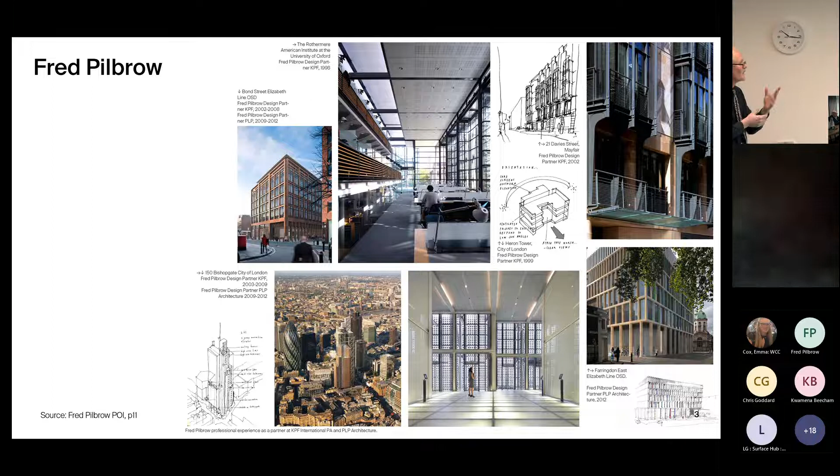We use thermal mass of the vaulted concrete superstructure. We use the mass of the books, and we ally that to night purge ventilation, drawing cool night air in and to a lantern at the top of the library. That has no air conditioning. It's entirely a naturally ventilated building, and students come here even in the summer months because it's a cool and refreshing place to work.

On our trip yesterday, I think I intimated we've got a long experience of working in Westminster, both doing new and refurbished buildings. This is Ingram House in the Adelphi Conservation Area, a rather unlovely 1960s office building that we did a cut and carve refurbishment to deliver residential sitting atop a plinth of offices.

More locally to the site and critical to, I think, the conversation we're going to have this morning is the Elizabeth line. I designed the over-station development above Bond Street, Crossrail West, to give it its full title, whilst I was a partner at KPF, and it moved with me when I moved to set up PLP Architecture in 2009. Rather by good timing, it opened this week. And this is a fundamental part of the conversation about 458 Oxford Street.

I don't have the embodied carbon that was invested in this piece of infrastructure, but it runs into the millions of tons. And it is an investment to deliver what I think is fundamental to our move to net zero: compact, efficient cities reliant on public transport, not private car usage. Intensification at the core, not sprawl to the suburbs. And when we look at 458 Oxford Street, within 5 minutes of this Crossrail station, we're looking at a site which is perfectly placed to deliver on those goals, to optimize development, as Russell in his opening remarks explained.

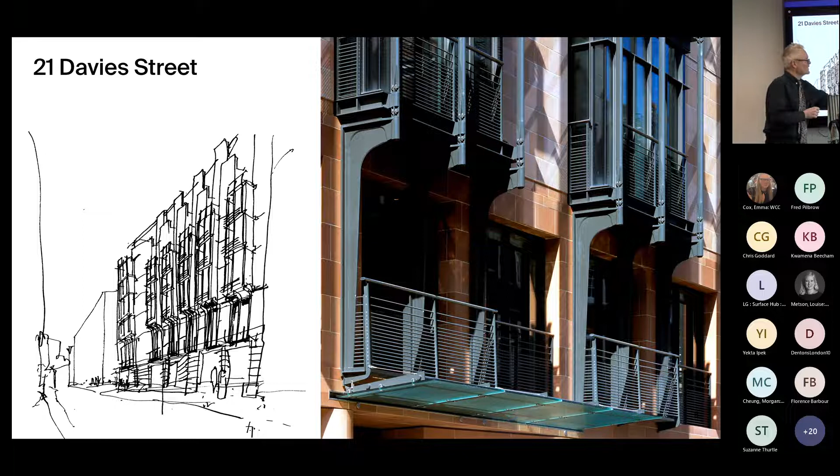Simon and I have debated a number of points on this project, but what we agree on is that we're not going to change the facade on 21 Davies Street after 25 years. This building talks to the quality of what we deliver and its durability and its long life. So in 2013, I set up my own practice with 5 fellow partners. And this is us 3 years later, proudly sitting in front of our first completed building, the Waterman down at Greenwich for Knight Dragon.

In the intervening 9 years, we've been privileged to work for a wide range of private sector and public sector clients. This is a project I'm particularly proud of. It's the specialist ear, nose and throat hospital that we designed for University College London. It sits in the heart of the Bloomsbury Conservation Area. It's a modern building, but sensitive to its setting. It's also a building that speaks about the life within. So patients faced with the unpleasant task of going to their dentist do at least get to circulate in the daylight. There are waiting areas in these bay windows screened by perforated brick that filters the light to the interior.

And I said we are passionate about sustainability. This project we designed for Dutch developers, Edge Technologies, who are internationally renowned for being at the very cutting edge of the best sustainability and the best well-being. We're designing their first UK project, and they picked us because as a practice, we developed our own in-house resources for environmental analysis, and we integrate that into our workflow to deliver better, more efficient solutions for our clients.

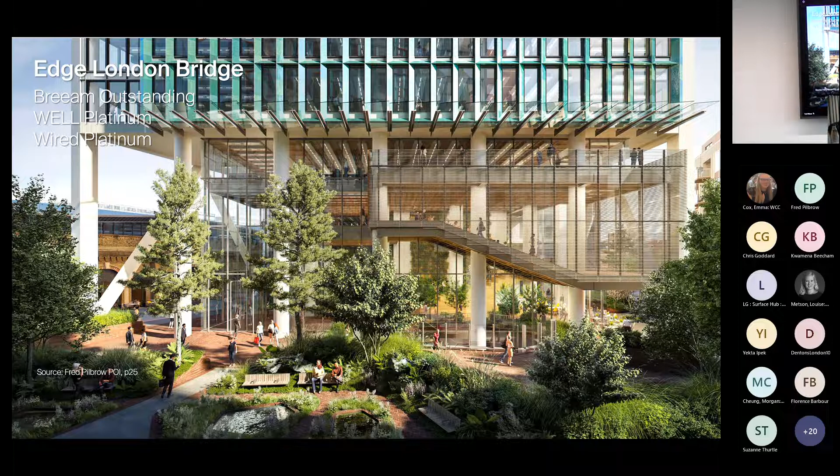And it's a garden park that the greening then flows into the base of the building, and the base of the building is public. It's a rather Dutch sort of view, moving away from the idea of a kind of august corporate headquarters towards something that's more public, more democratic, and more open.

And you see here in that public base of the building that the building is made of a hybrid structure. It's a similar structure that we'll develop at 458 Oxford Street, post-tension concrete with high cement replacement and structural timber. And they're working together, with concrete giving us a slim, low carbon, very robust superstructure, the timber giving us flexibility to connect and reconnect floors.

So here we are on the ground floor in the entrance lobby, and in fact, you're walking on recycled materials. This is crushed sanitary ware. So I don't think it's in the marketing, but you're walking on toilet bowls that we're going to recycle and use for the base of the building. There's a lot of recycled content, including the 6-story building we demolished to make this building. We're using a lot of the structure of that back into the landscaping and the new building itself.

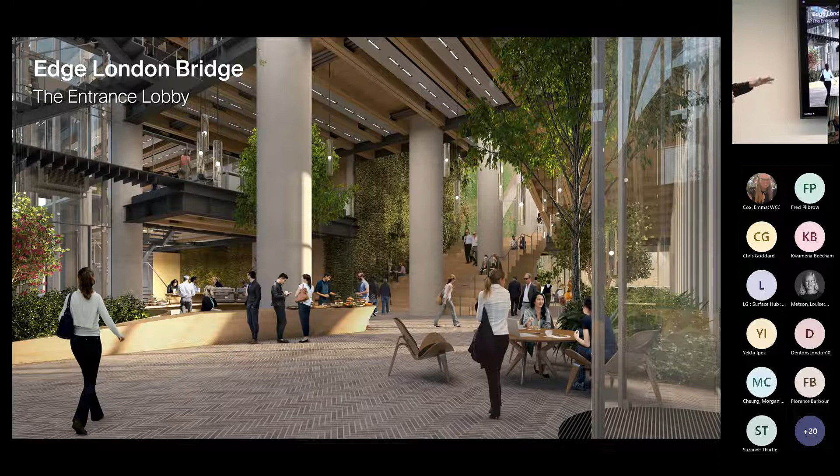Edge is important as well because it provided a lot of models for how we might approach the design for 458 Oxford Street, including sensor integration, of which Edge are absolute world pioneers. We're using a similar displacement ventilation system, so the air comes in quietly and cleanly from the floor. We expose the structure to the office space using the fabric of the building to temper the internal environment.

We're delivering energy efficiency of 63 kilowatt hours per square meter, inclusive of tenant loads. That is, to the best of our knowledge, the lowest, most efficient building in London. And to pick up the conversation about the integration of post-tension concrete and structural timber, that's delivering a very low embodied energy for the building.

It was about 860 kilograms of carbon for A1-A5 at stage 2, which is where we're at on the Oxford Street project. But working closely with Mace, who've just been appointed to build the building for us, we've driven that down by 20%. So we're now at 690. And that's an important point to make, that we will continue to push down embodied carbon. We'll continue, as we've done on this building, to push down operational energy usage.

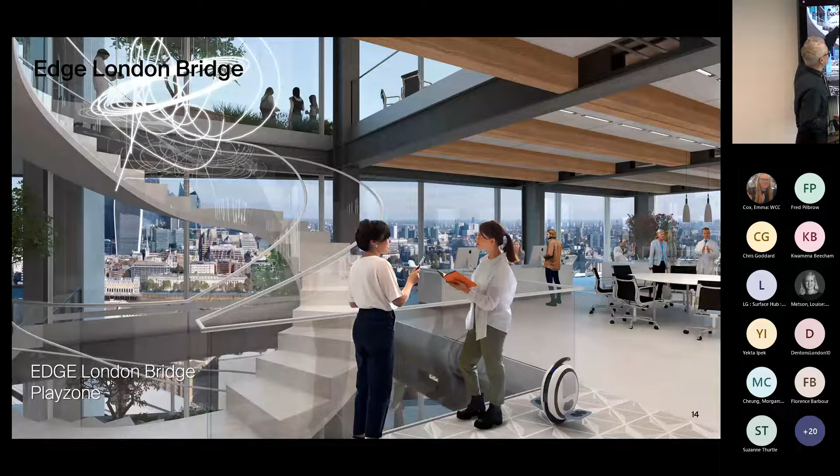Now, the play zone, as we somewhat lightheartedly describe it, is this timber zone when you first come out of the lift, and I'll show you the same thing at Oxford Street. Here, a tenant has made a connection across these 2 floors, and standing in the same position, this tenant has made other choices. So this is about long life and flexibility and adaptability. This is very key. We don't know how the building will be used in 10 years, in 20 years, in 50 years, but we know if we provide ample dimension and we provide flexibility, it's much more likely that the building will continue to have a beneficial long life.

And just while we're on this slide, another prompt for me is to remind us that we have gardens distributed up the height of the building. And well-being is every bit as important as sustainability for the current occupier market. People are drawing their teams back from working at home. We need to bring them back to a healthy, fresh, vibrant workplace.

Ian McCarter from Knight Frank, in his specialist report, described this as a flight to quality. Tenants are increasingly interested in how environmentally sustainable is their workspace and how good are the well-being credentials of it. This building ticks both those boxes.

So wind on to earlier in the summer, the office has grown to 70 people, and you'll recognise this because we were here yesterday, the Kensington building on Kensington High Street, a refurbishment of a former department store and one next to a Grade 2 star listed department store. We're feeling resonances, I think, with this morning's conversation. But there are, as I will explain, important differences between this site and Oxford Street, and those differences shaped our response to the two sites.

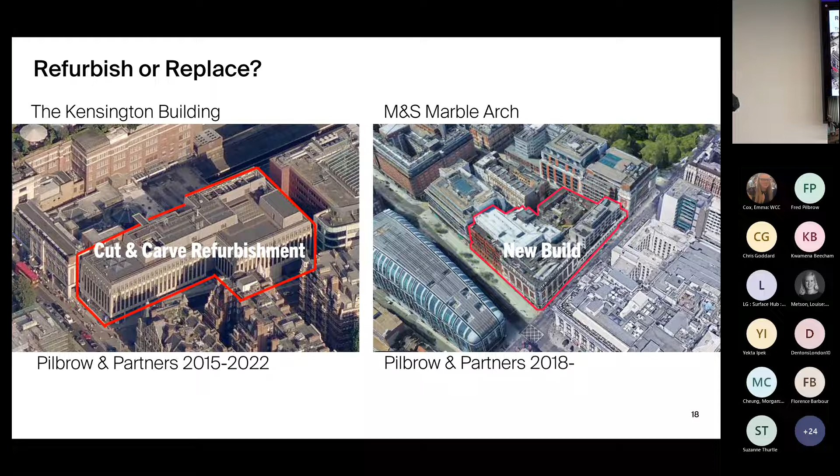So you'll see this rather brutalist orthogonal facade. We can restore the historic street line on Wrights Lane. So the differences are really profound to the opportunity that confronted us at 458 Oxford Street. There, we didn't have a single building. We didn't have a robust, regular structure. It's very clear that the site's development potential significantly exceeds what one might do in a refurbishment. And we have a single building to work with, and that profoundly affects the quality of the inside space.

So what we did on the Kensington building is... Fred, just before you move on, can you explain cut and carve so I'm completely clear about what's meant? Of course. Thank you for your question. So there are a range of refurbishment or retrofit options that can be deployed. A light touch refurbishment would seek to minimize the embodied carbon. So you would take the found condition of the building and you might judiciously upgrade the fenestration in the facade. You might do double glazing, you might renew elements of the plant, but you would say fundamentally the building's found condition is acceptable.

Here, we didn't feel that applied, and we employed a cut and carve, which is to say we demolished cores within the existing building. We created a new core out on the east elevation. So the cut, I guess, is what you take away that isn't working, and the carve, I guess, is what you're building back. And specifically, this drawing, I think, shows it nicely. We demolished the roof slab, we took away the cores that were distributed across the floor plate, and then we built back. Built back in a hybrid structure, post-tension concrete, bringing out the facade line on Wrights Lane, a new steel core at the back, and a new steel superstructure. We walked there yesterday on the 5th floor.

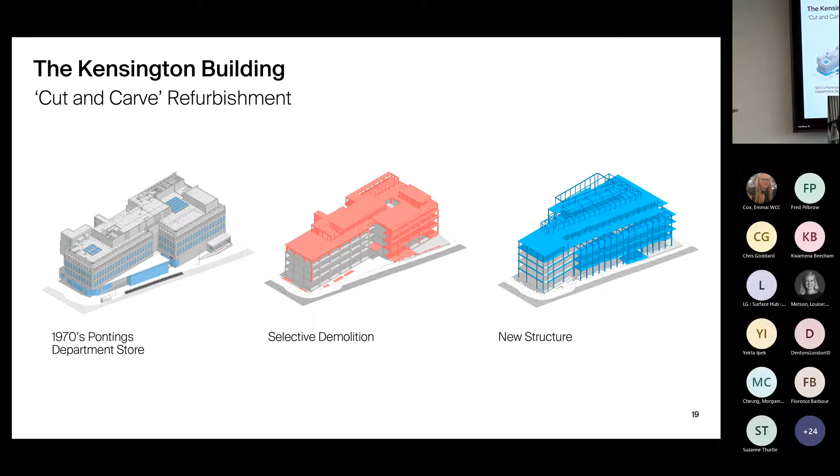And the building itself responds to a complex circumstance, to our balancing act, including residential neighbours here on Iverna Court. So we brought the facade line out, but we terraced back to preserve great daylight to those neighbours. And we like those terraces. You saw yesterday, they're beautifully landscaped garden terraces as an adjunct to the office space. And you'll notice that our context also includes 2 department stores. They're listed Grade 2, Barker's, and Grade 2 Star, Derry and Tom's. And they have some resonance, I guess, with the context for our Oxford Street site. Portland stone, giant order with bronze infill.

And actually, to some extent, the response we're making at Oxford Street has some resonance with the response we made here at Kensington, because we wanted to acknowledge that relationship. I love the phrase about the great galleons sailing down Oxford Street. Well, in a smaller flotilla, there's some great galleons here on Kensington High Street. And we wanted to acknowledge that, and yet at the same time remain subservient to the Derry and Tom's building. And we chose a white Roman brick. And the nice thing about the brick is, although the coloration makes the strong match you see in this image, it also acknowledged that we had brick neighbours across Iverna Court. It was, if you will, a more humble material, but one that has great richness and detail and depth.

And we celebrate the depth of the construction. We celebrate, for example, that we have opening lights. We're great believers in mixed mode and natural ventilation. You can open the windows to ventilate the offices, and the decoration of those window panels again makes some reference to the Art Deco detailing on Derry and Tom's.

So I was explaining differences between Oxford Street and this building, and this plan will do well to illustrate the regular column grid. You can see the original trace of the stepping building. We bring the facade out on that side. So you come onto that floor plate, 4.5 meters clear, things lined through. They've got a generosity, a scale, and order that makes it absolutely appropriate to deliver this quality of a workplace environment.

And I thought it was helpful because I know Simon and I, on our tour around the M&S building, were looking at some plastic ivy. We're not doing plastic ivy on 458, we're doing real plants. And our landscape architects, Gillespie's, who are brilliant, did the landscaping on this building.

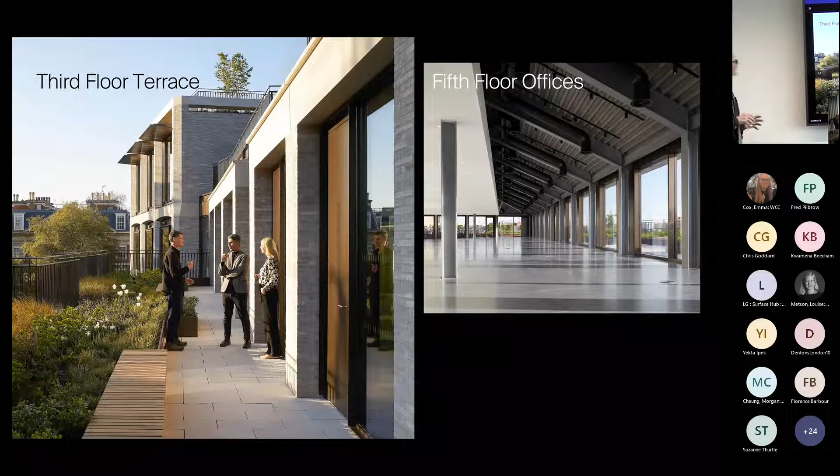And you could see what that was like in views from the conservation area around the site. Terraces on the lower levels, terraces again as at Oxford Street on the upper levels. What we didn't talk about on the site, which is in my proof of evidence, is what all that is delivering, and it's delivering very good operational energy.

So again, inclusive of tenant allowances, 105 kilowatt hours per square metre per year, and that was less than half the historic building. So more efficient plant, more efficient facades, delivering good operational energy. The embodied carbon on this building is 700 kilograms of carbon per square metre, A1-A5. And again, just so I'm clear on my terminology, A1-A5 is the construction carbon up to practical completion.

Now, there will be more embodied carbon over the life of the building, and there will be operational carbon, B6, and the water, B7, over the life of the building. So when we talk about whole life over 60 years, we're balancing two types of embodied carbon, to build the building and to maintain it, and laying on top of that the operational carbon. So I'm now talking about the building carbon, the 40,000 tons that I think was referenced by Matthew in the context of this project correctly. And the building carbon on a square metre basis is 700 kilograms.

Now you'll notice that that's higher than the predicted figure we have on 458 Oxford Street at the stage of design. That's 653, and Mel Allwood's proof gives you that detail. It's not to say that a refurbishment on the Oxford Street site would have this number, but it is a caution to say that deep cut and carve refurbishments can be associated with high levels of embodied carbon. And certainly we're in a grey area, not white refurbishment, low carbon, black, new build, high carbon. We're talking about differences of carbon intensity. And in this case, the results are great.

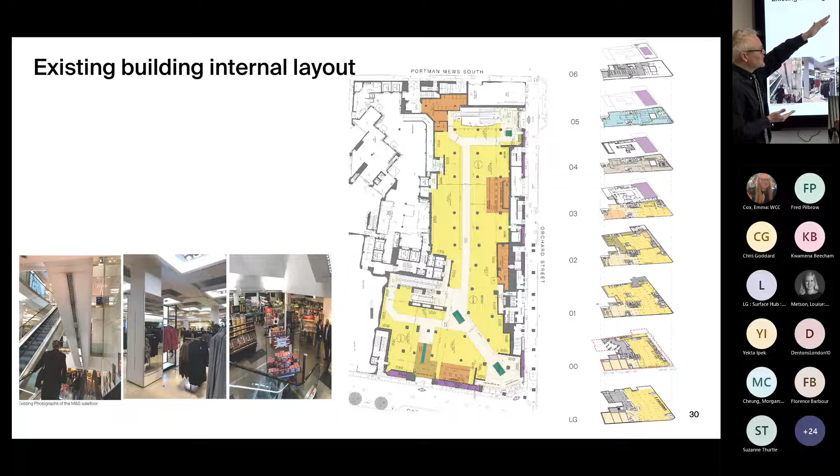You're also seeing the drop off in flows as you come away from Oxford Street. So you've got a series of very small floor plates. They run originally up to level 3, and fewer people make it to the upper floors. And you can see that in the sales data that M&S have published. It's not good enough. And it's got tougher for bricks and mortar retailers, because in the time of the rise of internet shopping, perhaps hastened by the challenges of the pandemic, people won't go to an environment that's as poor as this. It's just no longer competitive. We'll just click online rather than go to a space that's confusing and dispiriting, bluntly. So we've got to up our game.

And that's not only a challenge for M&S, although I think the existing building does exacerbate those challenges, because we've seen along Oxford Street the closure of Debenhams. We've seen along Oxford Street the closure of House of Fraser. John Lewis are radically downsizing. So it's part of a much wider challenge for the high street. And I actually remain really bullish about the high street. I think as an architect, they're a critical part of our public realm in cities. They're where we share space. But Oxford Street needs to evolve. And our vision for its evolution is for it to become more genuinely mixed use.

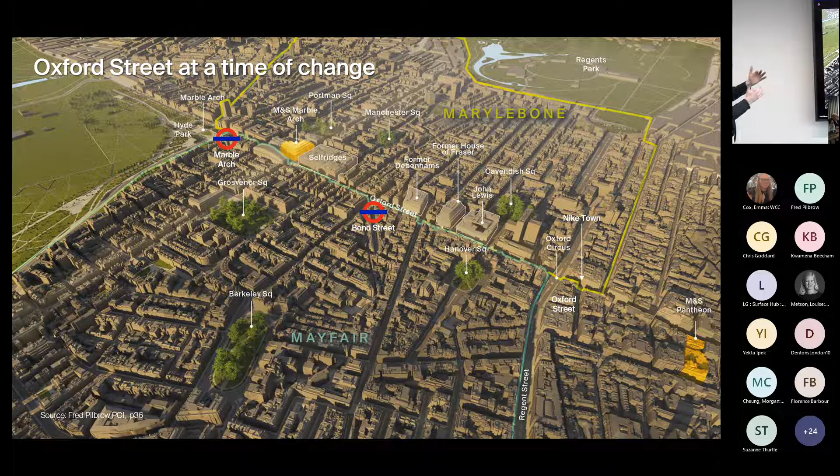So historically, it was a retail thoroughfare. I mean, that's not really true, because historically, I think 20% of the jobs was in retail and 50% was in professional services offices. But it needs to become more and more mixed use. So we bring new uses, office uses on this site, that will contribute to the vibrancy and the vitality of the street, will remain a public thoroughfare at the very heart of Westminster.

And the data's everywhere. You'll read the specialist reports that Andrew Bond has produced about the really challenging conditions for retail. But just if I take a snapshot, you've read in my evidence, looking at the street in 2017, this was the mix of department stores, high quality retail, some low quality retail, sort of temporary candy stores that we saw, and vacancy. And 5 years later, you can see the department stores have shrunk, the high quality retail has shrunk, the candy stores have grown, and the vacancy rates have also grown significantly. So we're looking at Oxford Street-wide challenges, and M&S are working within that overall environment.

The street, when we started work in 2018, and there was a question about these retailers. Were they pushed out by this development? Well, actually, they have a separate landlord, London Asset Management. And Andrew Turton from M&S confirmed that, in fact, these retailers paid to leave earlier than their lease expiry date. So we're definitely not responsible for what you saw walking around the site, which is low quality candy store retailers that are compromising the quality of the street.

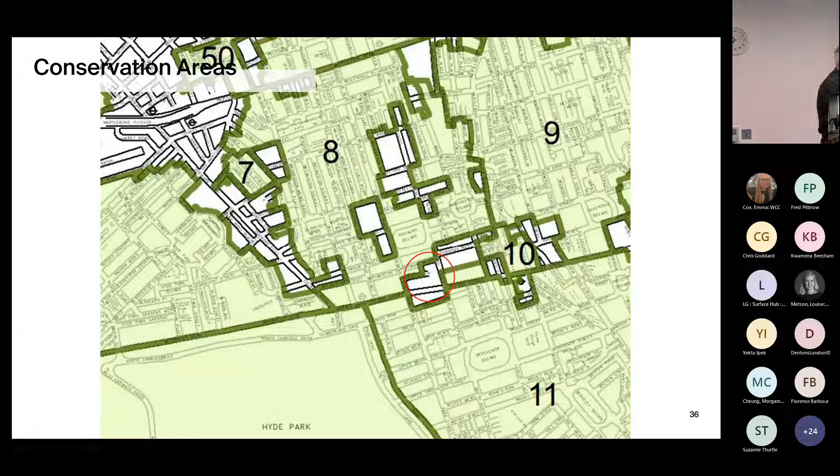The 3 existing buildings on the site are not in the conservation area, and I don't think that's an accident. I think Westminster are a pretty efficient and professional local authority. They have a statutory obligation to review conservation area boundaries on an ongoing basis, and quite clearly, those 3 buildings have been excluded from conservation areas that surround the site. We were talking about analogies of Kensington. Again, same situation. Kensington, we're not in a conservation area, but we were surrounded by conservation areas.

3 buildings. I guess the 2 that flank Orchard House are, for me, negative in respect to the surrounding conservation areas. This building, a non-designated heritage asset, sits at the lowest level of heritage significance from a statutory standpoint, as was discussed yesterday. It's not of listable quality. Now, there will be others more expert than I that will talk about the relationship of Selfridges, the fantastic Daniel Burnham Beaux-Arts masterpiece on the other side of Orchard Street, and this building. But what I see is, if there's a relationship, it's one that's very derivative.

I mean, this is a commercial office building. It's not designed for retail, and you can sort of see commerciality creeping in. So you notice that the giant order Ionic columns on Burnham get kind of reprised as pilasters here on Orchard House. But we squeeze in an extra floor. So rather than 3, you get 4. They're squished in a little bit. And rather than those great 2-meter deep columns, it's all thin paper. It's pushed to the thinnest degree. So it has a kind of meanness about it in comparison with the Burnham buildings.

And Pevsner agrees. The pilastered Marks and Spencers, he's not quite right about that, because actually it was designed for John Lyons. "The pilastered Marks and Spencers 1929 to 32 by Trehearne and Norman with W.A. Lewis shows clearly what a convinced single-minded design Selfridges was." So it's damned, if you will, with faint praise.

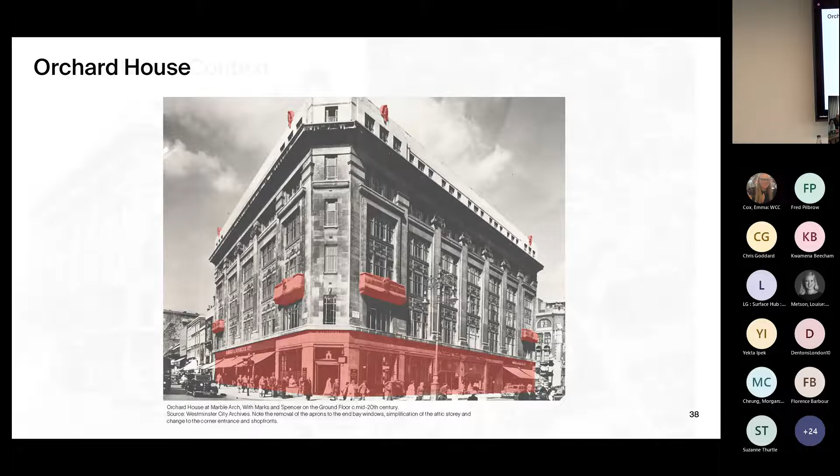And it's a building that's been very substantially altered. Buildings do get altered, but this one's really been scraped. So the decorative carvings of Mr. Lewis removed, with the exception of the Knight's Head that we're going to relocate. The balconies on the first floor stripped away. So we're looking at less than an original design. I think that original design not exceptional.

We're also looking at a change to its urban context, which is really important to the work that we'll look at on the site. So originally it was a building that terminated an urban block, and Granville Place ran through to Orchard Street, and Orchard Street then provided a connection through Somerset Street to St Christopher's Place. Well, Selfridges has expanded across that, but as we walked yesterday, you see the route is still clear within the store.

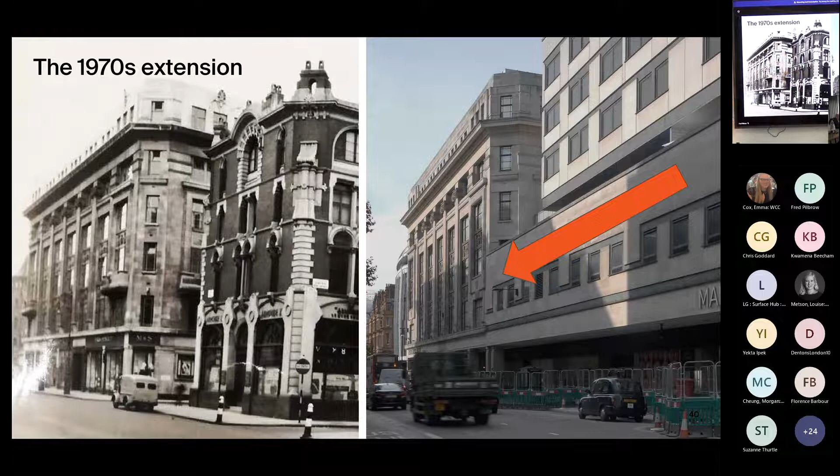In 1968 to 1970, the 23 Orchard Street extension was constructed, blocking that route, and is it Roy Lichtenstein's Kapow? I think architecturally this is brutal, abrupt, and poor. It just crashes into the back of Orchard House. And it gets worse, because at the time of the extension, the road was widened, 4 lanes rather than 3, and that drove an undercroft under the bottom of the building.

So it's been kind of crashed into on the edge, it's been stripped on the upper levels, and we've now got an undercroft along Orchard Street. And this undercroft, which we walked to yesterday, is dark; it's an oppressive environment for pedestrians. And I think it's worse, the fact that you don't even have the shop fronts on this side.

We don't have them because there's a core sitting there. So you're between a blind solid wall and a row of columns hard out onto the footway. It's not good enough, and it's not good enough in policy as well. So if you look at the Oxford Street District Place and Delivery Strategy, Westminster's document says Orchard Street, not good enough, needs to be improved. Granville Place, not good enough, it needs to be improved.

And the 1973 building bridges over Portman Mews South. It's calamitous in terms of the quality of the public realm, a dark, low tunnel. It's calamitous in terms of its impact on Hesketh House, the Hanston building that takes us to Portman Square. And we walked this yesterday, it gets worse around the back.

On Granville Place, Russell said, does it smell bad? It smells of diesel. It's really a really poor environment for pedestrians. Well, there aren't pedestrians there, and it's probably good that there aren't, because to access these loading bays that dominate these frontages, we've got vehicles reversing across the highway into the loading bays. You would never be allowed to do that today. It's completely unsafe and unsustainable.

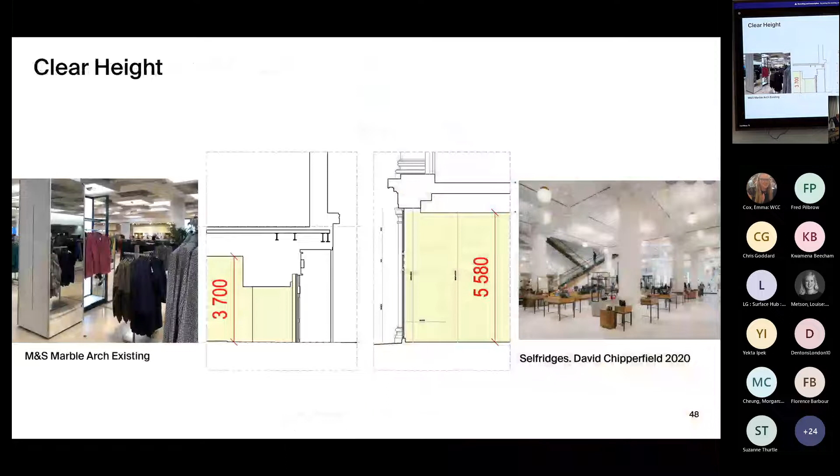But equally, we don't know what the future will hold in the long term. And a lot of the conversations we had with M&S's brilliant retail team was to say, well, what things are coming along down the line that we can see now? I guess those are Donald Rumsfeld's known unknowns, things like, for example, till-less trading. That's coming, and we're thinking about it in the store.

But actually, the biggest legacy for long-term flexibility is generosity in scale, so that we have an open, adaptable floor plate. And I liken this to retailers' theatre. In a way, we're building the infrastructure, but the scenery will change, will evolve, will adapt to stay relevant, to stay attractive, to stay successful. And that's possible because we're creating the right framework for that transformation to occur.

It was also really clear from the data that fewer people go further up the building, so we've got to be a ground level proposition, all space within one floor of the Oxford Street entrance. That's absolutely fundamental. So you come in, go down a floor to food at the lower ground floor, go up a floor to menswear on the first floor.

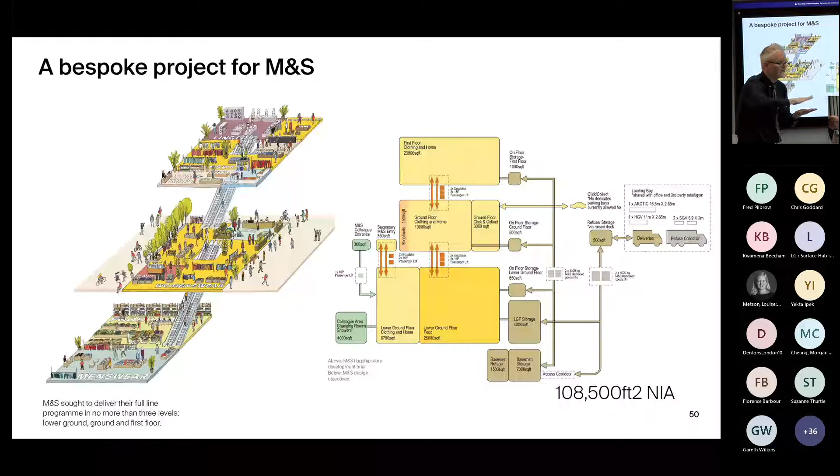We therefore need large floor plates. We therefore need the lower ground floor to be retail trading. Now that's absolutely fundamental to what we'll talk about, because actually what you need in these buildings is a lot of support infrastructure. So we don't have any cars, but we do have fantastic cycle facilities, lockers, showers, all the ancillary for that stuff. Where does that stuff go?

We have plant that's going to deliver really low operational energy. Where does that stuff go? Well, in a refurbishment, you're locked into the existing lower ground floor. You can't dig a deeper basement under the existing building. So we know the answer to that. It goes on the lower ground floor. But the corollary of that, of course, is that you don't have retail down there. And that means that the M&S stuff has to go up, not one floor from ground, but 2 or even 3. So fundamental to delivering this vision, we need to create some basement space to deal with those support functions.

And this is the detail of the area brief. We also were given dimensional targets and so forth. But when M&S started work, and we were working from the summer of 2018, they explicitly tasked us to take a comprehensive set of options. We would have done this as architects in any case, and consider all potential routes to delivering their brief. And I summarised in the DAS here 16 of those options. There were many more. And they dealt with a number of issues that we now think of as settled, but were live for us to determine.

So, for example, did we include Neale House, or did we seek to deliver their brief just on the Orchard House and Orchard Street extension? Did we deliver one building on the site or 2? And what if the site's capacity was significantly more than the retail demand? What was that balancing use best conceived as being? Was it office? Was it hotel? Was it residential? We looked through all of those options and we were helped in that journey by close and ongoing dialogue with Westminster to assess the relative merits of those schemes. We included a wide range of refurbishment schemes, light touch, cut and carve, facade retention.

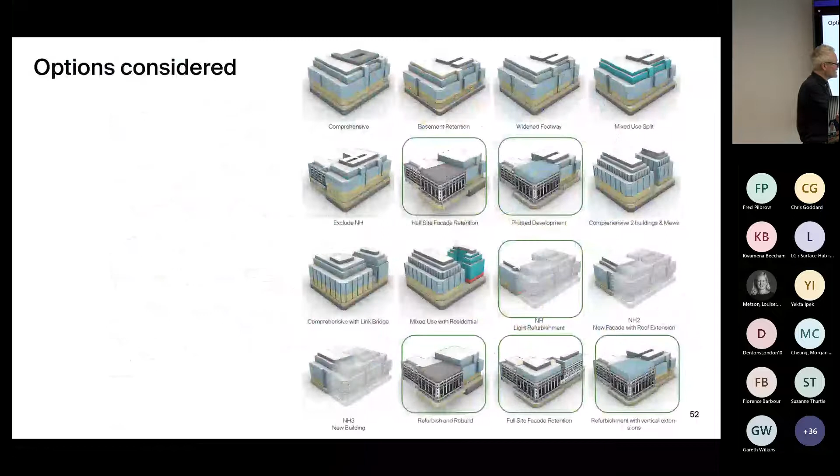Just to take one example, this was a study looking at excluding Neale House. We were thinking, could we use Neale House maybe as a decant space while we delivered accommodation on the Orchard House and Orchard Street extension, and looking to how we might configure large floor plate retail for M&S on the lower floors. You'll notice here, because it's a refurb, we don't get any basement space. So here, the yellow is the M&S running on those upper levels. And then to access the offices across the top, did you create a core on that edge? But I've got to say that none of these schemes came close to meeting the requirements either of M&S themselves as a retail operator, nor optimizing the site dimension.

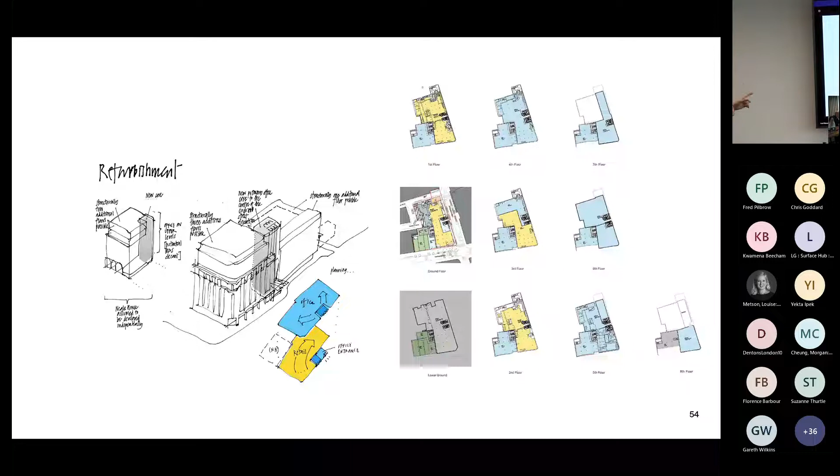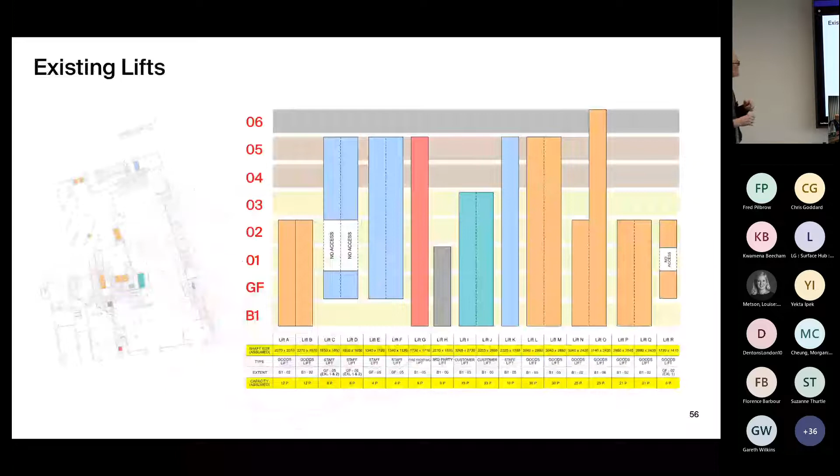And some of the challenges that we were grappling with back in those initial studies was looking at a building. I've talked about 3 buildings and the challenges of 3 different structural systems, different grids and their misalignment. But actually, to make them function as multi-level retail, huge amounts of adaptation took place since the building's construction. So we have no less than 9 cores scattered across the plan, a lot of the cores at the building's perimeter, and no less than 18 lifts. And you can see that the lifts are a little bit vague: some serve some floors, some don't serve other floors, some are passengers, some are goods. They're scattered across the plan.

And those cores and the lifts within them block the views on the ground floor. That's bad for the public realm. It's bad for an M&S brief that now wants daylight. And of course, on the upper levels, those cores are very problematic for daylight to the office use. I guess all of this is saying that light touch is certainly very problematic because the basic form of the building isn't going to be good for that future office function. And, you saw it looking around the site, the majority of the windows are blocked. It's not that they've just been filled over, they're blocked with actual cores that have been inserted in behind those facades. So we really need to remove the cores to get light back into the interior.

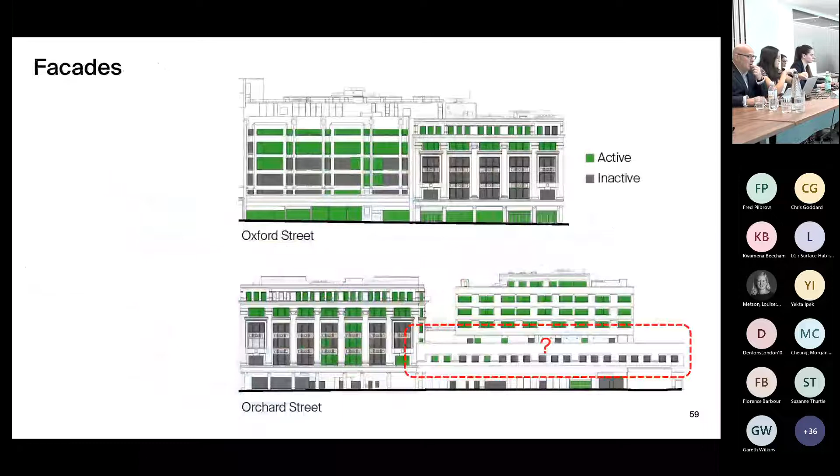And we've got sections of the fenestration. Let's look at 23 Orchard Street, where the quantum of glazing is wholly inadequate to, for example, an office use on the space behind it. So there are built-in problems with the fenestration from sections of the site. And then we come to the columns.

I think I actually pointed those four out to you when we were in the store. So you have quite a tight column grid generally, but you also have zones of very, very intense columns with gaps of sort of 1.5 meters. So effectively, it renders the space around those very densely columned spaces unusable. You can't do display in there. They just effectively end up being kind of neutralized space.

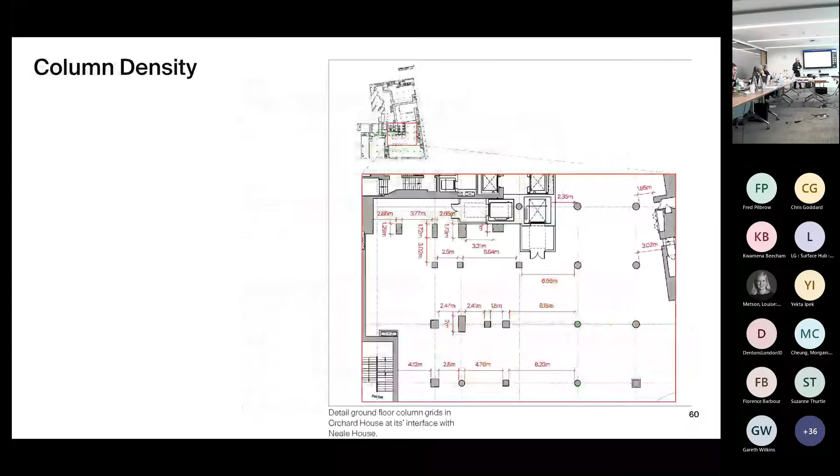And the tough thing about the columns here on the ground floor, here on the typical floor, is that they are the building. It's the thing that holds the building up. So yeah, we can talk about removing cores, but we can't realistically talk about removing the columns. They're basically what is invested, in Griff's terms, in the embodied energy of the existing building.

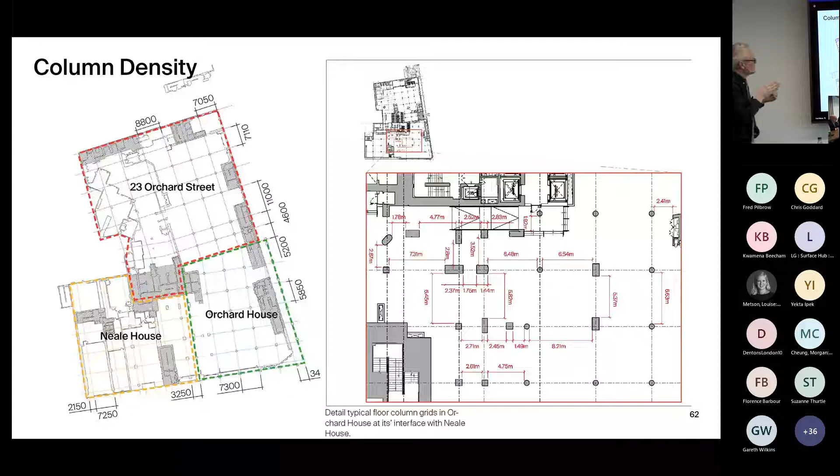And as you saw in those long views around the store at the moment, because the grids misalign and crank, you don't get those nice clean sight lines we saw in Selfridges. You get basically lines of columns that block your view. So it feels claustrophobic. It feels very poor quality space. Now, those are potentially subjective comments, but I thought it was helpful.

You saw in the evidence that M&S appended to Chris Goddard's group: what are they doing on other comparable modern M&S sites? And this is looking at the bay size for the projects that are cited in that evidence. I've drafted it, but the numbers are based on the numbers in evidence. And you'll see that the existing building, by a large margin, is way denser than the kind of column grids that are typical for contemporary M&S occupation. This is a mixture of new build and refurbishments.

I also want to say that you'll notice ours is not the biggest column grid, right? So some of these go to 12 by 12, and we're 9 by 9 or 9 by 10.5. And that's not accidental, because this is a dialogue we had with M&S. We said, if you go super big on the column grid, you go very high carbon. You kind of move towards steel, which is very high carbon. So we sort of compromised to go with a sensible grid, more open and more regular than the existing building, but not, I would use the word, greedy.

We're looking at compromise. In fact, interestingly enough, it's very like the Selfridges grid on the eastern side of the store that we looked at yesterday. And it's noted in evidence from SAVE, quite correctly, that a number of other department stores further east have been refurbished: Debenhams, House of Fraser. But I think when you look at the plans, you can immediately see that there's a huge difference between these buildings, which are broadly of a single date and arranged with a regular orthogonal column grid, and the car crash of the three different grids that we see within the building.

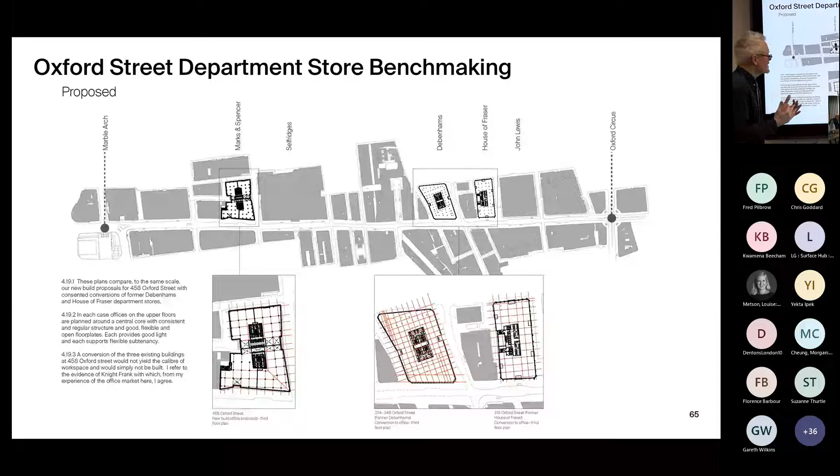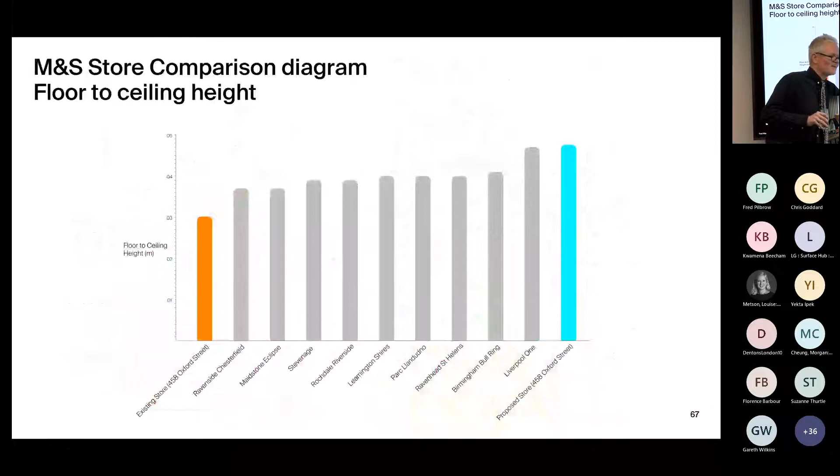Now here I'm right out on the most generous side, and perhaps we might debate that, but it does seem to us, and it seemed to M&S in setting the brief, that we're right at the heart of the international centre. We're on the nation's high street. We're a flagship looking for a long-term future. We think we should be no worse than our neighbour Selfridges. We want to deliver the highest quality of space.

But be that as it may, very clearly the existing doesn't meet the standards that have been delivered on other buildings. So we talked about cores, we talked about ceiling heights, we talked about column grids. There's another problem, and Simon and I have been in correspondence on this, but go to level 2, and you saw it yesterday, the floors don't align. They don't align at level 2, they don't align at level 3, they don't align at level 4. They do align at level 1, so no question that there the floor is level. They don't align at the ground floor.

Actually, you don't notice that because the two separate candy stores, shops, are set at a different level. And it's worth mentioning, by the way, while we're on the ground floor, did you notice the entrance is inaccessible for wheelchair users? You have to go up to get in the front door of your store. Not good enough for M&S, not good enough for us. Shouldn't be good enough for anyone looking at that. So we get these level changes, and what does that mean in practice? It means we have ramps, we have very complicated circulation. It's not as accessible as a level flat floor would be.

And I touched on the basement. I'll go through it again. Basically, one floor is going to be needed for plant and support space if we convert the others to offices. And we don't want that floor to be at the lower ground. We want to put that down in the basement. And look, that's a discussion. I hope Matthew will ask you questions on this, because basements are high carbon.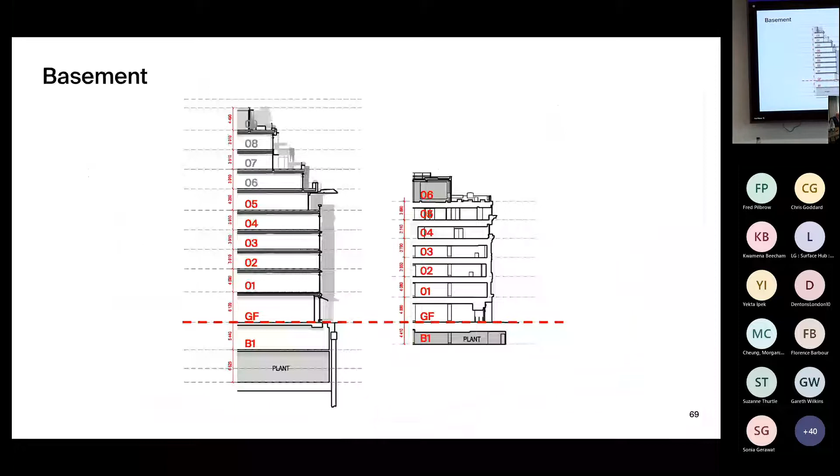I mean, the Edge building, we've got 3 levels of basement, and again, Simon and I chatting in our letters over the course of the summer debated the Google building at King's Cross. 4 levels of basement. Simon was involved in that, and he said he regretted the depth of the basement. But it did have some good things, because you can build the basement, and you can put the plant, and you can put the cycles, and you can put the support spaces down there. What you get at ground floor is active frontage. So you don't need to sterilize really valuable, really important, really prominent space for the stuff that you want to put out of sight.

Now, in August 2020, Matthew Pendleton and colleagues at Westminster, guiding our work on the site, suggested a development envelope, a ground plus 9-storey building. This is the model that they very kindly provided for us. And very simply, you can say, well, does that then describe the site's capacity? And in suggesting ground plus 9, I apologize for the quality of this slide, we're in good company. Park House, ground plus 9. Former Debenhams, ground plus 9. House of Fraser, ground plus 9.

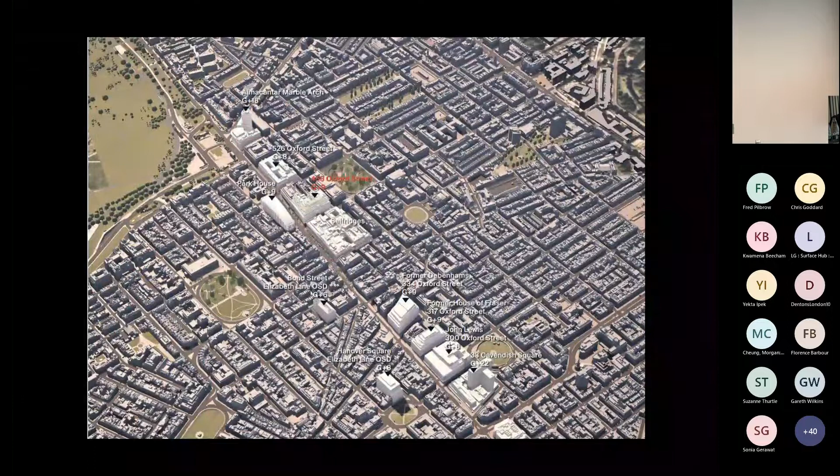So I love that description of the great galleons. I think it was in Alex's proof, the great galleons sailing down Oxford Street. I agree, but the galleon scale has evolved, has changed, and we are simply part of that evolution, similar in scale to those neighbouring buildings and comfortable neighbours with our Oxford Street context.

So just running a slide rule over that, we can deliver, as you've seen, about 61,000 square metres of development on this site. If you do the same calculation for refurbishment, and this is based on Arup's numbers, calculating the maximum structural capacity, so this is extending these buildings to their absolute limit, you get to about 45, perhaps 47,000. So around 74, 76% of the development potential of the site. Put another way, you're missing a quarter of the development potential.

So it very significantly under-delivers on a site that is really, really well placed in relation to the transport infrastructure, and really, really unusual, and Russell reminded us of this yesterday, in that it's in the 22% of Westminster that's not conservation area. So in other words, the opportunity to optimize development, sitting on top of the Elizabeth line, is not one that comes often or frequently. This is the sort of site where that uniquely can happen.

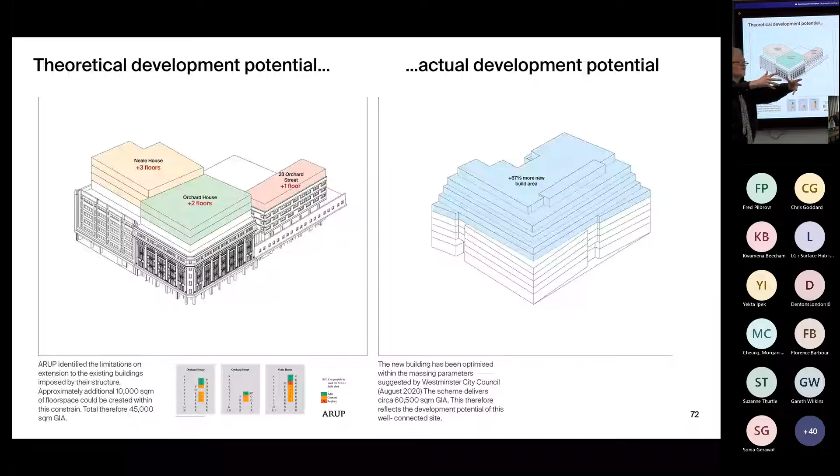So I'll illustrate the refurbishment alternatives, and I'll have to look, for example, at the scheme that Simon shared with us a couple of weeks ago. But it's important to say that viability is absolutely fundamental, and I don't think those refurbishment schemes are commercially viable. They have architectural shortcomings, but I don't think they're commercially viable. So we concluded that a new building was the route to deliver M&S's operational brief. It was also the route to optimize the site's development potential, as we must do by policy.

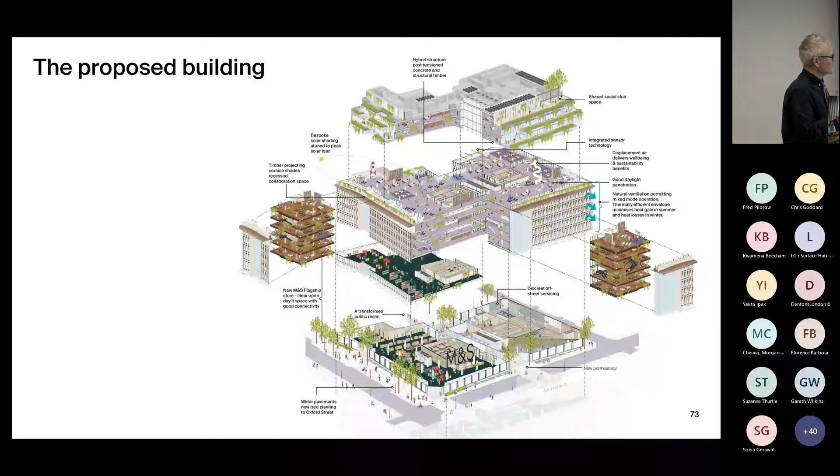That wasn't a journey we took alone, so we were in frequent and close discussions with Westminster, frequent and close discussions with the GLA. We had 50 meetings over 18 months with numerous stakeholders, both statutory and non-statutory. We had public exhibitions, we've met with neighbours. And so what I'm sharing with you is not our work alone, it's really the product of that collaborative engagement and dialogue. And the building seeks to be exemplary in its retail and contribution to Oxford Street. It seeks to be exemplary in the absolute top tier of new workspace, and it seeks to effect a transformation of the public realm, and that's where I might suggest starting work.

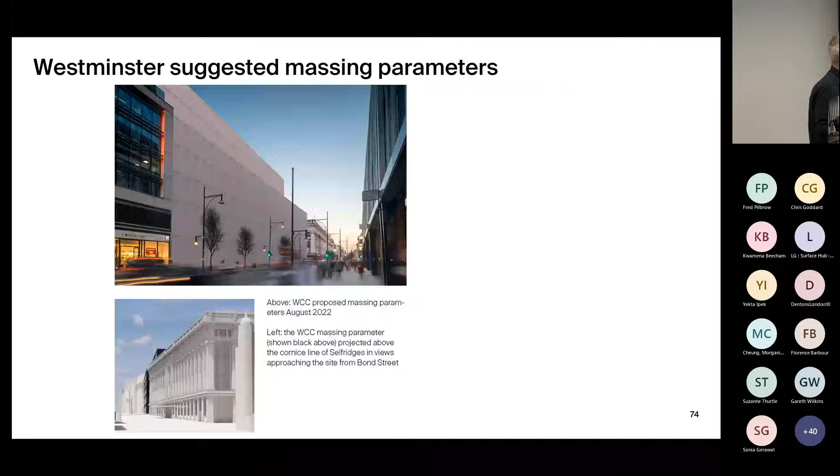So we looked very carefully at the relationship of that massing parameter to Selfridges, Daniel Burnham's wonderful Grade II* listed department store, tough. It's a masterpiece. And frankly, we were a bit concerned. So we're actually suggesting the building was smaller than Westminster's parameter. Let's go again. So this is standing in the Stratford Place local conservation area view, I think something that Alec asked us to look at in his rebuttal.

And you get here the full force of the Burnham masterpiece. A great plinth containing the ground floor retail, the giant order Ionic screen, and then supporting this tough, robust entablature with a strong cornice above that overall composition. It's a piece of bravura architecture. It's pretty unique within London. And Carolina just clicked to show you the impact of our proposals. I might have to reverse to that again. Click that back if you would.

And forward. So from this view, and I repeat, this is the view that we were asked particularly to look at, you can see that we entirely preserve the silhouette of the cornice of the building, and we continue the cornice line further along the street. That feels no more than good manners. Let's look at that in a computer view if we can. So again, Westminster parameter, our proposal, no visibility above the cornice line. And if I'm walking from Marble Arch coming east along Oxford Street, you see a continuation of the cornice line of Selfridges through the cornice line of our proposed building.

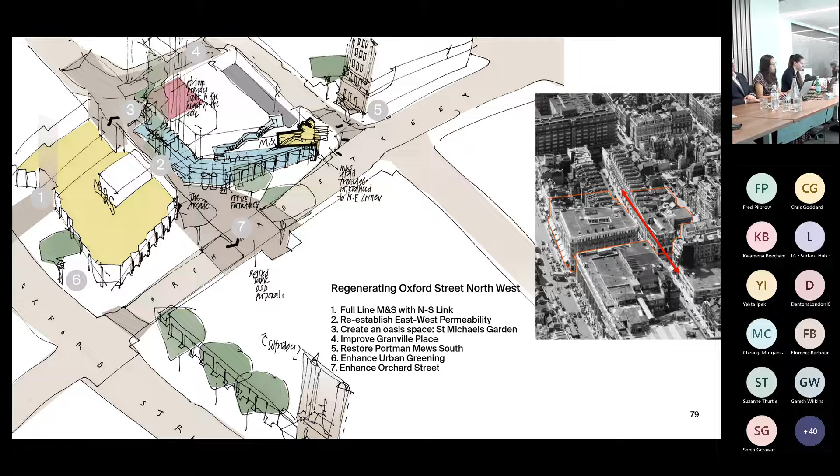A bay that delivers really efficient servicing for M&S and really efficient servicing for the offices on the upper levels. And all of that discreetly placed on Portman Mews, where it faces another loading bay serving the Portman Square buildings. And I think always our thinking here was joined up. So we can move the servicing to the Portman Mews, we can recreate a garden space on Granville Place. Maybe click again, Carolina, if you will.

And that garden space, linked by a wonderful arcade to Orchard Street, will then do the journey that we took yesterday through the store to the David Chipperfield piece and on to St Christopher's Place. And that importance of creating wonderful oasis spaces off Oxford Street, well, it's all in the Oxford Street District Place and Delivery Strategy. Westminster notified that it's really key for the offer that you have a place where you can stop, you can rest after lunch, you're shopping, a quiet oasis garden space.

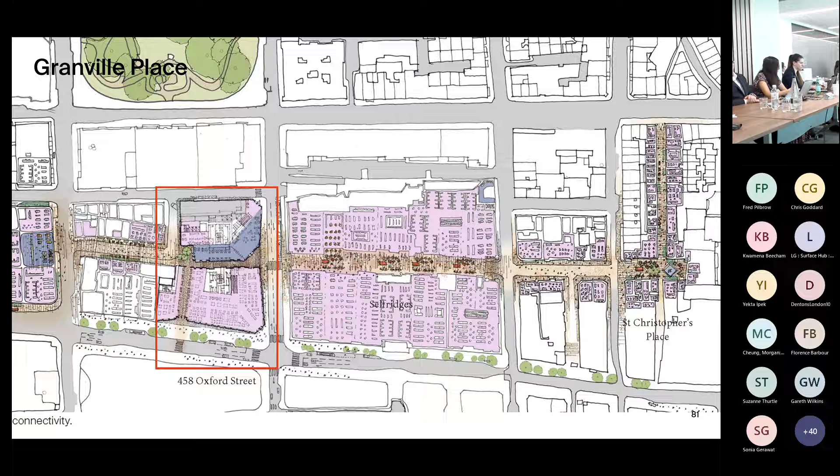And our oasis here will have a cafe, we'll have an entrance to the office and a frontage to the M&S, activating that part of the site. So in blunt terms, what we have today and standing in the same place, what we will deliver through these 458 Oxford Street proposals. You see the arcade, and rather nicely that gives you a glimpse at Mr. Burnham's wonderful plinth on the Selfridges building.

Ahead of you, we have an entrance, a secondary entrance into the office, and the core that serves the upper levels of the building. On our right, the M&S, and on our left, a cafe, and the cafe linked to a gym. There's some of the other ways.

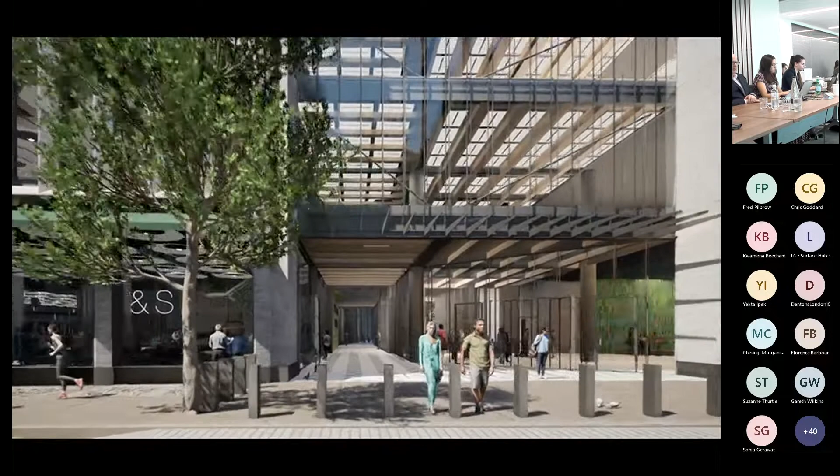So we've left Selfridges now, and we're walking across Orchard Street to a wide pavement, and then we're in a space with on the left, the new M&S flagship, on the right, the office entrance, and you come to this, a top-lit atrium with wonderful landscaping cascading down it, and you're drawn through to a garden space, an oasis, to use the terminology of Westminster, with, again, direct access into the M&S on the left.

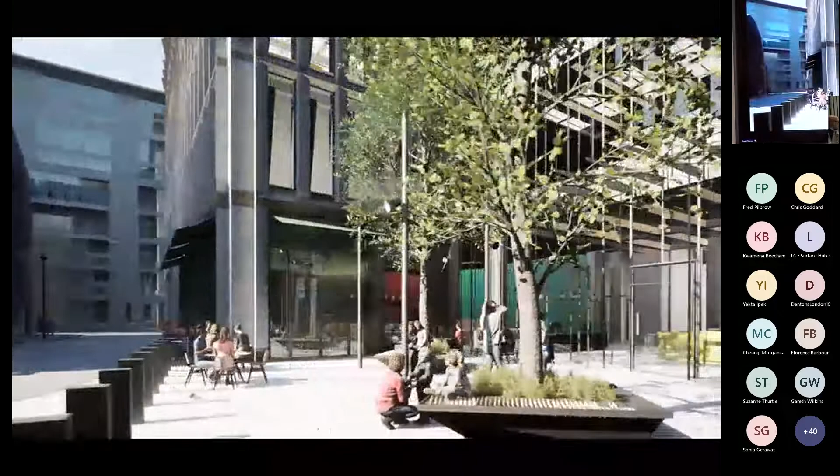And I'll turn here to see the cafe and connections to the gym on the left of that space, and on to the office secondary entrance from Granville Place. So we're about making a suite of active frontages around this space itself.

And then this route runs through the M&S. It's kind of an arcade, recalling the M&S's origins, the Penny Bazaar, that connects you back to this garden. So a sequence of links across the site. But that inflection of the facade then frames a vertical cleft. So from a wayfinding standpoint, it's really clear where you can make those links across the site to the new public realm delivered by the building.

And I guess those clefts, in a contemporary way, make reference to Mr. Burnham's wonderful central cleft in the heart of that 21 bay Oxford Street frontage. Well, the cleft's a contemporary reinterpretation of that, and you're looking up to timber ceilings, and at the ground floor, this new arcade. This is Orchard Street. We have a similar detail on Oxford Street.

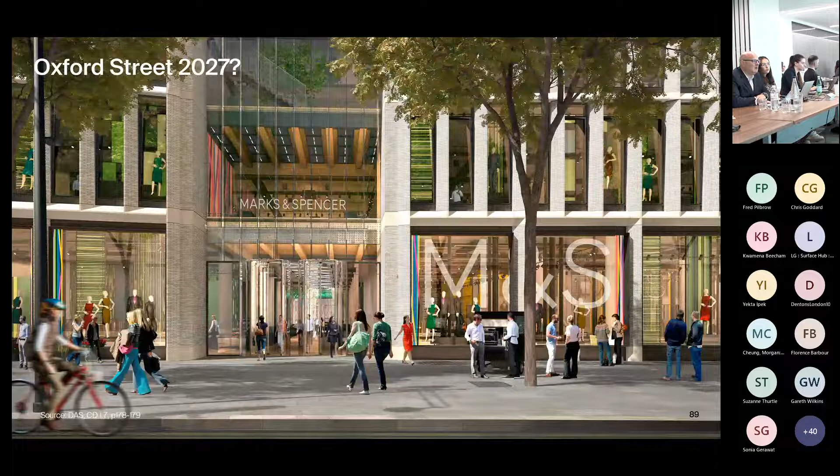So Oxford Street today and Oxford Street as we envisage it standing in the same position. So this is the Oxford Street cleft. You come into a little double height space. You're connecting up to the M&S trading on the first floor, and out beyond, you've got views to the Granville Place garden.

Now, it's often said, and I think it's said by a number of people who've commented on the scheme, well, the M&S building on the corner. But of course, M&S isn't just the corner building. The M&S is the whole of the Oxford Street frontage, and this building celebrates that presence with wonderful open glazed frontages into the ground floor of their three-level trading presence, and a very clear invitation to enter and to

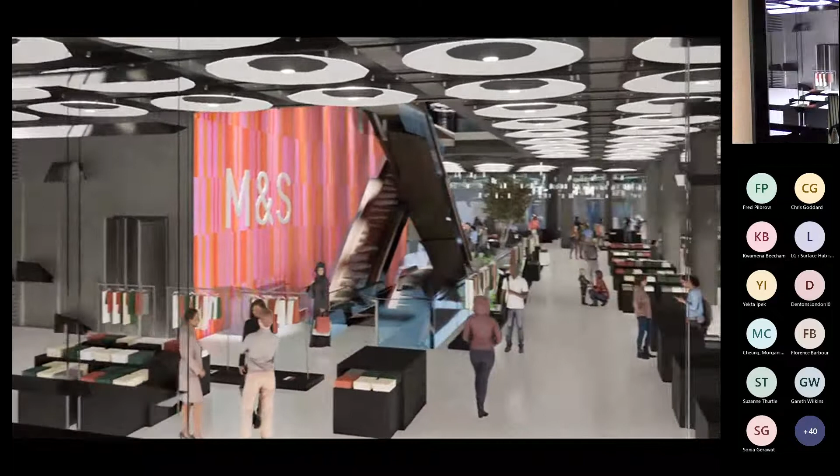explore. And you'll recognize in the scale of the space we're delivering here, the 5.4 meter ceilings, the 10.5 by 9 meter grid, many of the same elements that you saw in the Chipperfield Selfridges. We want to be no less good. Indeed, we believe it to be critical to be as good to succeed in future bricks and mortar retail.

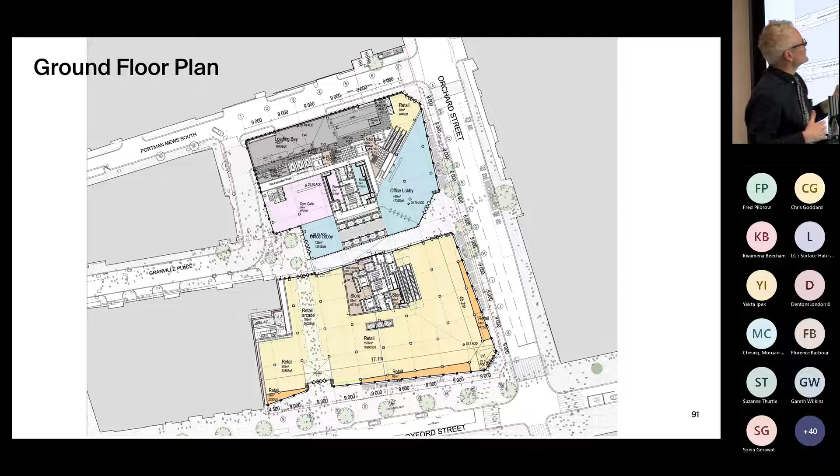The offices are equally important to Oxford Street's vitality and future success, and they need to have the right arrangements for reception and entrance. And we create on the northern part of Orchard Street, and activating that arcade we just walked down, a really grand main lobby with a subsidiary lobby, and they have all of the support spaces that you need for a fully functioning modern office. And we finally include an entrance to the food hall facing up towards Wigmore Street and towards Portman Square that adds extra activation on the northeast corner. That connects down into the lower ground floor.

So we'll talk a lot about the quality of the buildings and their contribution to the setting of Selfridges. And I wanted to have this conversation standing with you here on Orchard Street, looking south to Oxford Street, and to ask, is this really the setting of a Grade II* listed building? I would prefer this, where we draw the building back, we create a wide footway, open to the air, and you can really celebrate and enjoy the full expanse of Burnham's masterpiece.

Let's do that in the other direction. So today, rather hazardously, our photographer is out on that narrow strip of pavement, and what we would like to produce is a wide footway crossing to Selfridges on this edge, introducing street trees importantly. We haven't talked about urban greening, but we introduced new trees on Oxford Street, new trees on Orchard Street, new trees on Portman Mews South, new trees on Granville Place. And those trees are possible only because we can draw the building back to give you dimension to create that green space on that edge.

We want to sweep away this bridge. This is an ugly disfigurement of the Portman Estate Conservation Area, an ugly disfigurement of Hesketh House. Our building not only removes the bridge, but repairs the flank on Hesketh House and returns, I think, more importantly, Portman Mews to a decent public street. There's no reason why it needs to be a service tunnel. It creates something of an appropriate calibre. And you can see the Portman Estate have been supportive of these proposals precisely for that transformational change.

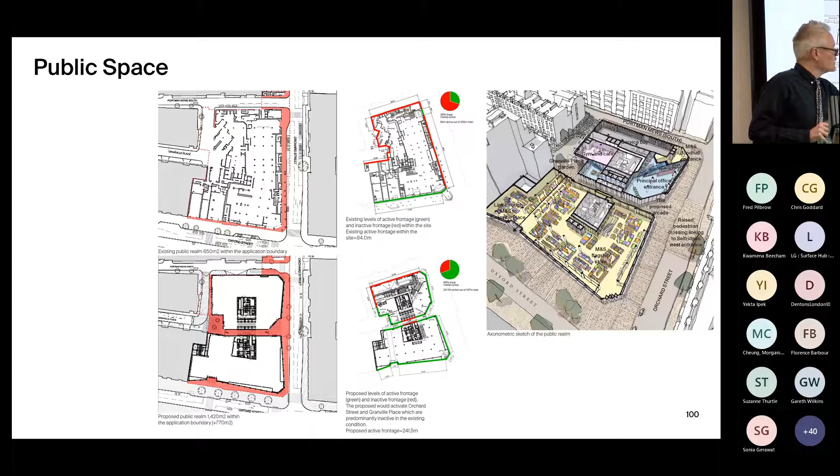Just to put some numbers to that, 770 square metres of new public realm, high quality public realm, delivered by the new building in comparison with the existing. It's about, I think, 8,500 square feet. In active frontage today, 84 linear metres of active frontage. The great majority of the site is blind, inactive, hostile, unsafe at night. We'll triple the amount of active frontage. 240 linear metres of active frontage delivered on the proposals with consequent benefits to the public realm.

Mr. Pilbrow, how are you doing? We're doing good. I'm moving quick. We're nearly there. Okay, splendid.

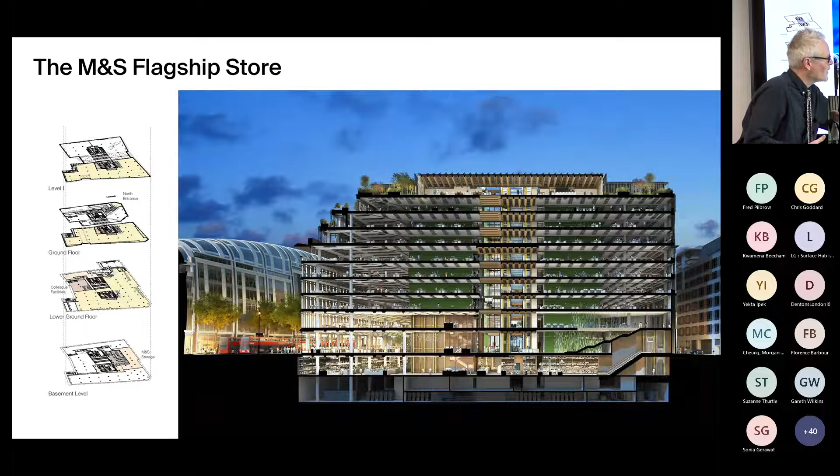We talked about the floor-to-floor heights. I think just to say how different they are when we drive into detail. The 6 floors of the existing equate to 5 floors in the proposed. So we're sharing essentially a full story of accommodation back into the other parts of the building. What that yields is a sensational M&S flagship: ground, first floor, lower ground. Lower ground you see running all the way through the depth of the plan, with sort of quietly humming away and supporting all that support space in the basement that's critical to that function. And that delivers an extraordinary customer journey front of house, but it also underpins a very efficient servicing and logistics plan, developing these with M&S to make sure that they continue to operate best quality service in the most efficient manner.

So we've looked at the retail on the ground floor. We've then 4 floors of office accommodation above. I'm walking up Oxford Street, and above the cornice, there's 3 further floors of office accommodation set back behind some landscape terraces. You saw a similar detail on the Kensington building. So the offices are very carefully woven into the public realm strategy.

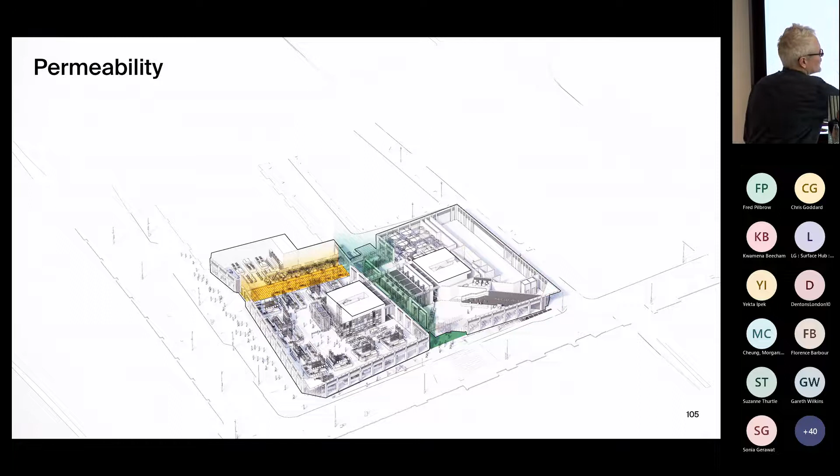So we have the garden, the connectivity from Oxford Street to Granville Place. We have the active frontages that I've just been outlining, including the office lobby on that side. The plan for the offices is to deliver really beautiful and high quality workspace, a centre core, taking benefit of the great perimeter light that we can deliver in the new building, and it supports flexible tenancy so that we accommodate large scale and small scale organisations.

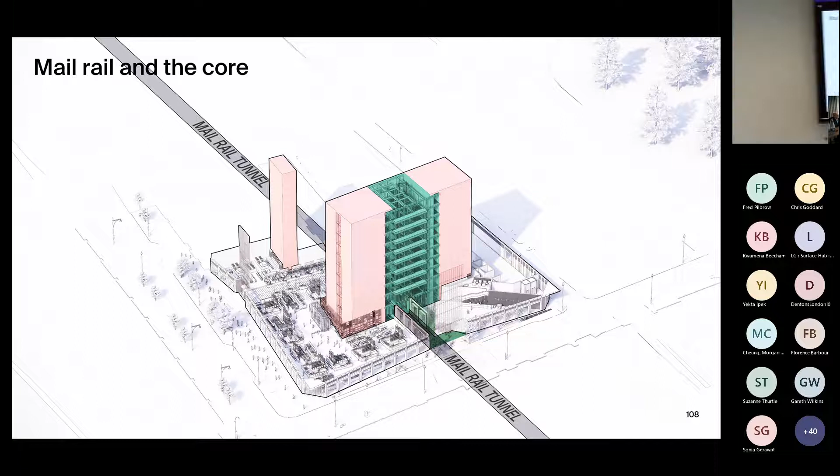We have mail rail running onto the site. That meant you couldn't build a heavy core in the middle of the site. So the middle of the core is lightweight. It's a glazed set of lifts. It's an atrium, and it means that when you're walking to and from the vertical circulation, you're walking to and from light. I think it's something you saw in the Kensington building as an interest, and we have light at the heart of the plan.

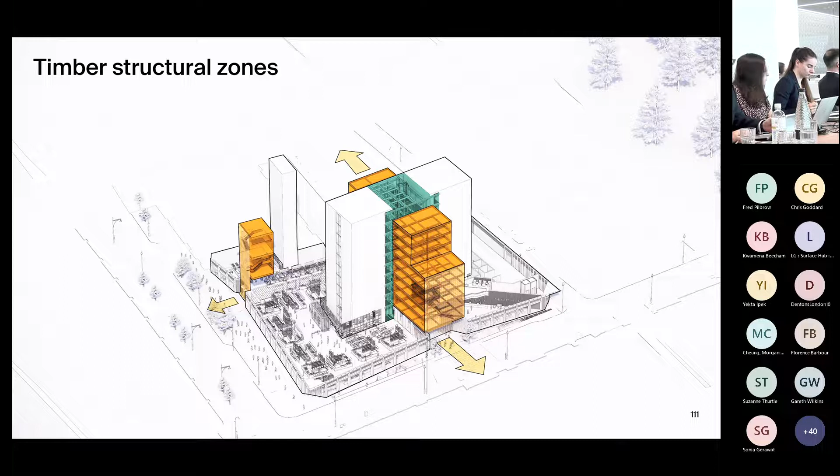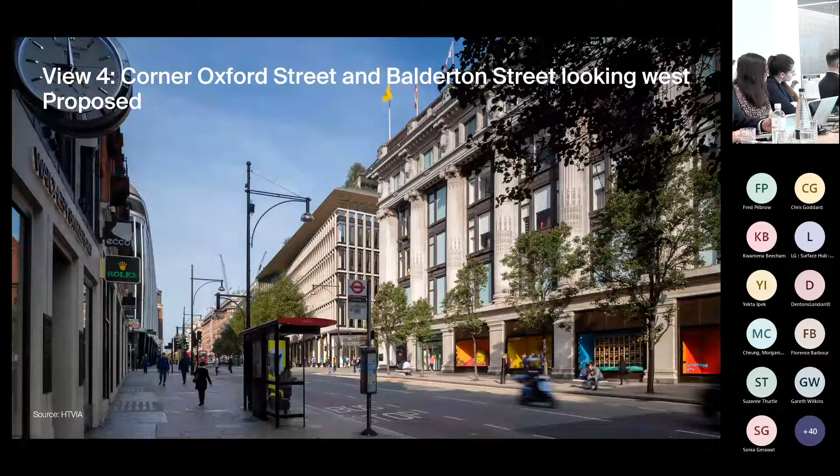Clothing the base of the building, we have a well-scaled street wall. Ground plus 4, where it touches Selfridges here on the southeast. Ground plus 5, where it's adjacent to Hesketh House. And those relationships are studied very carefully with Matthew and colleagues at Westminster. So here you can see the ground plus 4, the recess to the cornice, reflecting the scale of the entablature on the Burnham Selfridges. And here you can see ground plus 5, abutting the cornice, and again reflecting the scale of Hesketh House. So we're making careful street wall relationships between the new and the old.

And that cornice itself is a strong horizontal datum. It's sometimes described as oversailed. I just want to say it's actually built entirely within the site curtilage, unlike Selfridges, which sticks out over the pavement. The fact you see it is because we've drawn the body of the building back in. And that cornice is timber. The timber reflects the presence of structural timber within the body of the building.

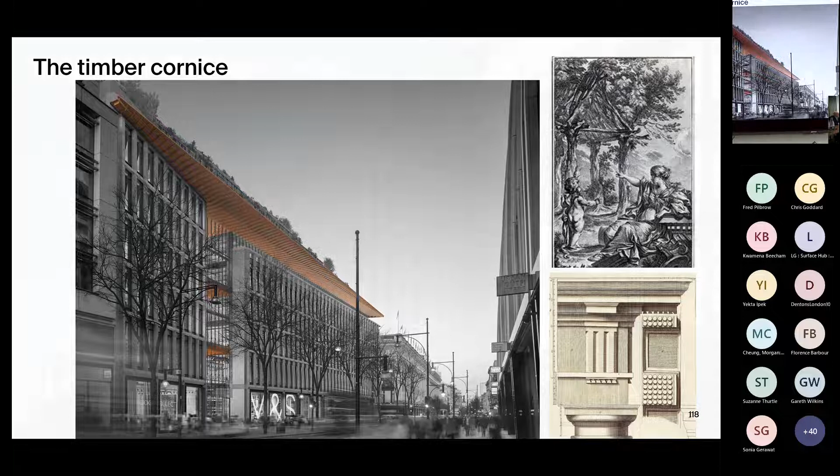And I guess if we were to be a little more poetic, we might go into a discourse about classical architecture's origin. You'll know, sir, that this makes stone what was originally constructed in timber. So, for example, the dentil moulds are the ends of timber joists. I learned the phrase petrification. Here's the Abbé Laugier. I love this story. So the original timber is returned to in a highly crafted and sculptural timber element that finishes the top of the building facade. Petrification is the term in question.

Timber's up there. Then we have the main body of the building, white Roman brickwork, and Portland stone string courses at each of the storeys. And we're looking at whether we can actually reuse the Portland stone on the existing building to provide that material for us. You'll notice the relationships to Selfridges are ones of material, but importantly, for scale, we're actually much finer grain, and that's not accidental. We don't want to compete with the giant order of Selfridges, so we're looking at a finer grained gridded facade, but it's not a blunt grid. It has elements of articulation.

One that I'm particularly interested in and want to describe is the environmental approach to the wall, because we want to deliver very high internal quality with low energy. And we developed a series of bespoke solar shades that protect the interior. And they nicely are a kind of third presence between the glass and the masonry that gives the layering. You'll see that they're different on each of the floors. Could you liken it to the entasis of a classical column? There's a slight gradation. So we're not a dead, repetitive frame, but something that has richness. I think I have a few details on that.

So just to say, the piers themselves articulate as they go up. You saw that in Kensington. And this is the work we were doing with our colleagues at Arup to optimize the performance. We targeted the regulated loads of 55 kilowatt hours. In fact, we're significantly under that with 33 kilowatt hours per square meter regulated loads.

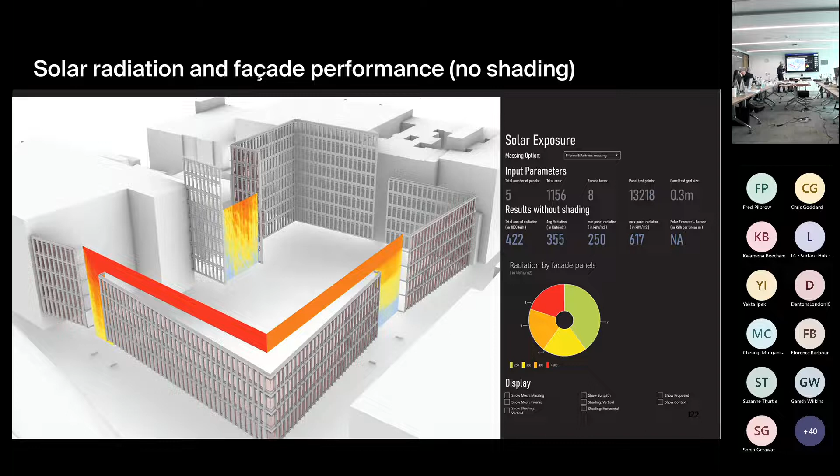And the efficiency of the shading, the lean part of this equation, is the biggest single step we've taken to deliver that. Without the shading, the exposed glazing in the clefts and on the recessed fifth floor would overheat. The cornice protects the clefts and the recessed glazing. But the glazing on the facade is a really innovative thing that's not been done before.

We track for each window the peak moment, the peak hour in the year when you get the greatest solar load for each window. And that's obviously dependent on orientation, on height, on the adjacent buildings. And then once you know where the peak load is, you can design a very simple and efficient solar shade to block that sun. And when we run the analysis with Arup over the year, we discover it's a very, very effective means of reducing direct solar gain.

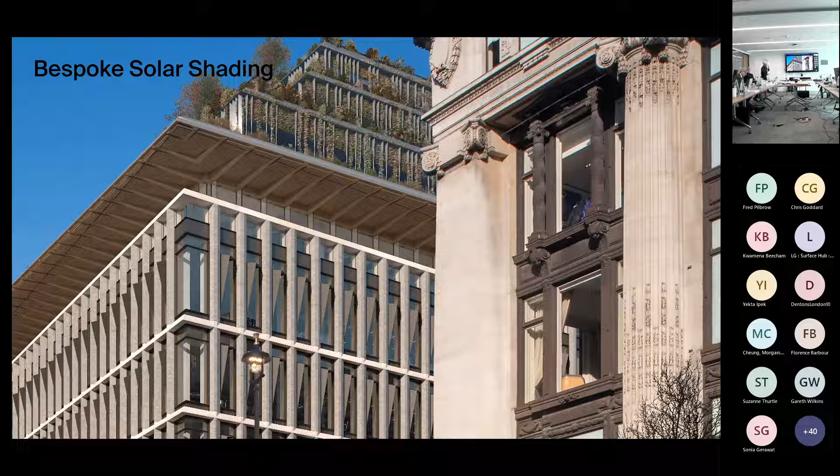And it's a direct response, but it's also a response that layers richness and beauty. So this is the contemporary elevation. It has, in its own unashamedly modern way, some of the richness of the fantastic Solomonic columns in the Burnham elevation. I'm conscious I'm running over time, so I'll go super fast.

At the top of the building, we set back, again, compliant with Westminster's parameters, compliant with the good principles of base, body, and attic, the attic setting back. And actually, for the office, that's really good, because we're giving a variety of office products. Some users will want deeper floor plates, some will want shallower. All of them will have very high quality space within the building.

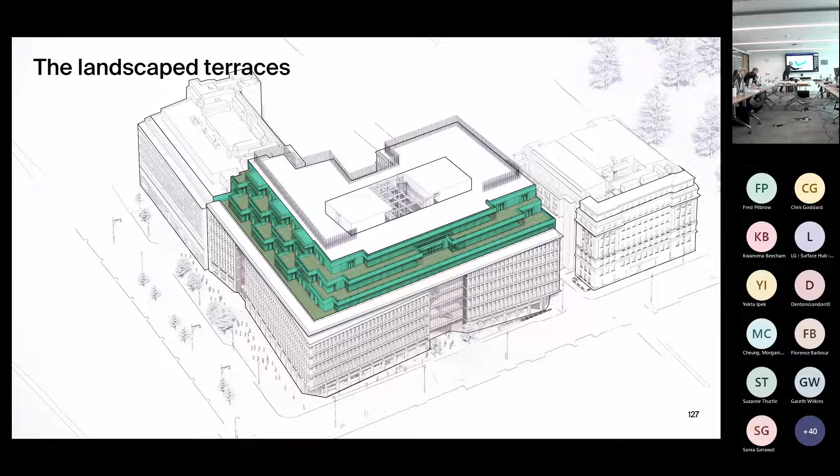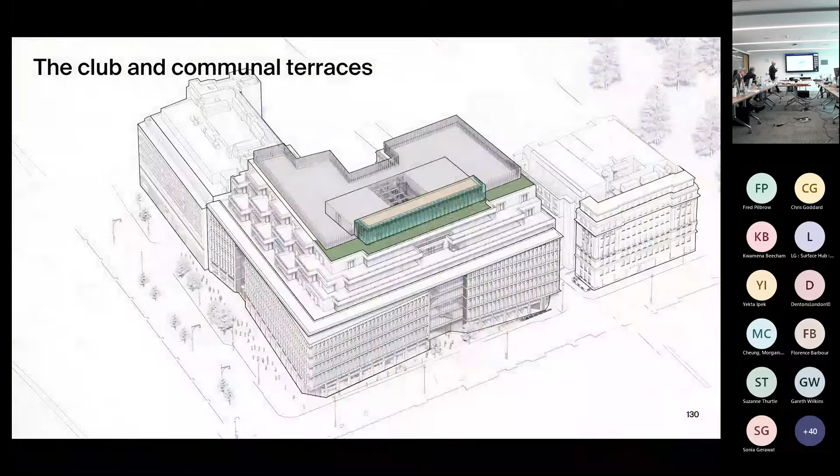And this gives you a flavour of how the gardens, which are a series of pocket terraces on the Oxford Street frontage, are woven into the daily life of the office buildings, with brise soleil upon which we're going to grow these fantastic climbing plants. With a shared club room on the top, and that club room benefits from a generous terrace and fantastic views. And this matters because we've got to deliver the highest quality of office space to meet the demand for this calibre of workspace in the city.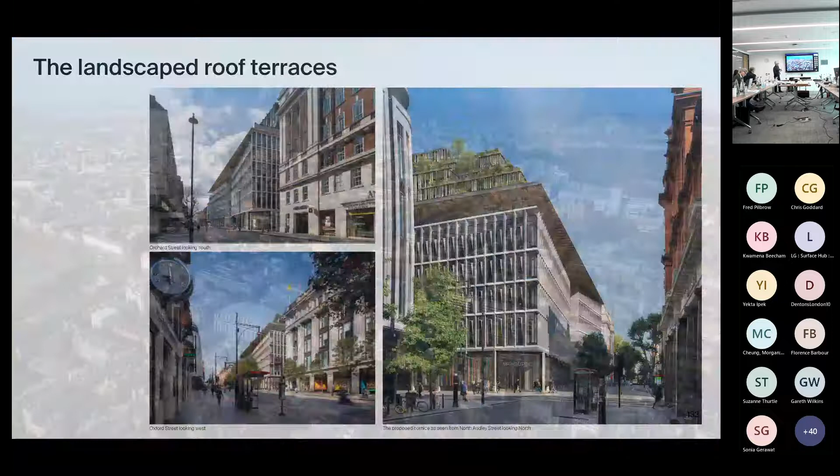An aerial view, and I'll show you the model if I may in a moment, would emphasise that this looks like quite a grand gesture, sort of pyramidal cascading gardens. And so it is, but actually when you experience it at street level, it's pretty modest, very modest in the context of Oxford Street. Very modest in the context of Orchard Street, walking down from Portman Mews, you just see it there. And pretty modest as we go down North Audley Street. You see it more as we come further away.

And again, I'm completely positive about its impact in terms of its presence. We're in a very green part of Mayfair here, and that green will resonate as it does at Kensington on the upper levels of the plan. And to emphasise, real plants, not plastic ivy. I think we're nearly there. And then we take the landscape down into the building.

I've touched on some of the passive design measures that we've adopted, working closely with Arup, who are achieving BREEAM Outstanding, WELL Platinum, WiredScore Platinum. We're in the top 6% of offices in terms of consents granted in 2021. I think we're probably going to be even better than that, but there's no question this is really the most sustainable model for development across the site.

So finally, we had at the last moment some thoughts from Simon about what a deep cut and carve refurbishment might be like, and I thought that was really helpful because in a way that gives you SAVE's vision for what might be delivered on site. I think it was worth us spending 5 minutes perhaps talking about that. What Simon's done, borrowing sensibly on the work that Eric's done, is saying, well, we've definitely looked to maximise the development potential.

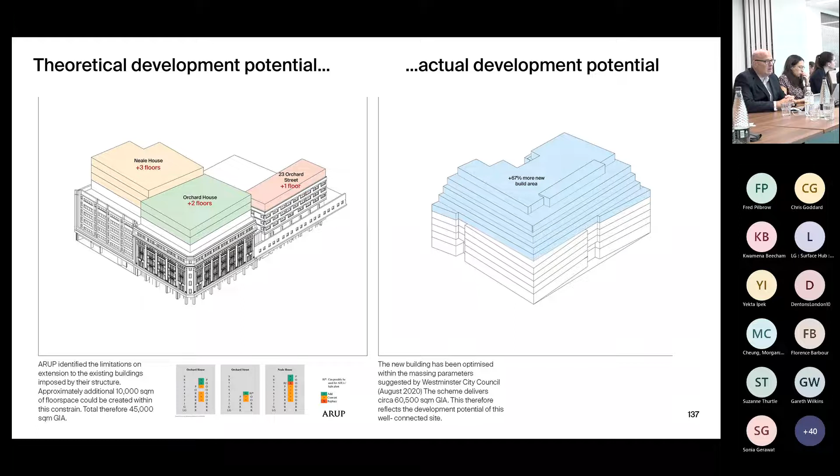We can add 3 floors to Neale House and 2 to Orchard House. I think he's correctly saying you could probably add a floor at the back of 10 Portman Mews, which isn't on this drawing, and do all of that stuff, and we'll get to about 45 to 47,000 square metres. So it's very significantly below the quantum that would be delivered by the new building. I said theoretical because again, there's a huge question mark about the viability of delivering what I will show you, very compromised quality space, and not giving much additional area to fund it.

It would be a good idea to deliver a garden space at the end of Granville Place. It would be a good idea to deliver some permeability. I think Simon suggested here to Oxford Street. We'll come back and look at that in a little bit more detail. A good idea to get rid of the, what was the phrase, unpleasant undercroft on Orchard Street. So you can see there's a great deal of common ground in terms of what we would seek to deliver, but can we deliver it?

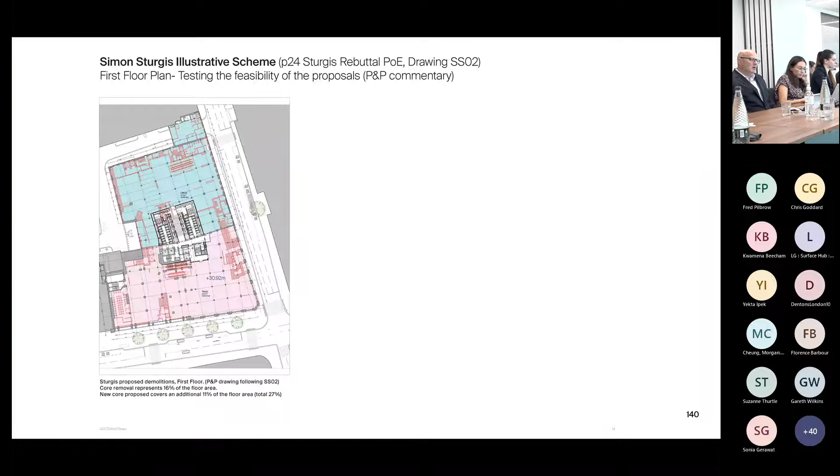Well, the first point I would make is that this is a very, very substantial cut and carve. We're going back to our lexicon. There's a lot of cutting. So removing the 8 perimeter cores is about 16% of the floor space, and then to create a new centre core building, a further 11%. So about 27% of the floor plate, Simon is suggesting, needs to change to get an acceptable result on this site.

And we need to pause there, and we need to ponder, because you saw Kensington and you saw the embodied carbon. 11% of the floor plate was changing. 11%, 27%. So this is a very substantial intervention. Now, to be fair, Simon says we work with existing elevations, so we wouldn't have the embodied carbon of the new elevations that we were producing at Kensington. But the level of structural intervention is huge.

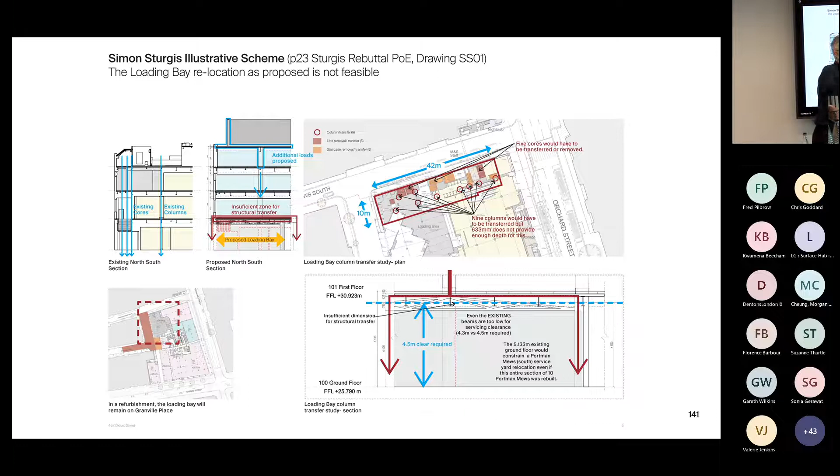So that I think doesn't work, and it's going to get tougher because I'm, with Simon, do we add some extra floors? Yeah, we can do that. But of course, we're adding extra load onto those very columns that we then need to transfer. And even if you said, hey, I'll knock down the back of the building and just rebuild this section, you're still locked into those existing floors. 5 meters in the existing, 6 meters in the proposed. We have the 6 meters for a good reason. It gives space to do loading bays. So in summary, no, I don't think you can do that.

Nor do I think you can get rid of the, Simon's word, unpleasant undercroft on Orchard Street. Now, why do I say that? Because the new highways arrangements are funded by the development, so important parentheses here, it's possible because our development is viable and is making Section 106. But let's say you took the assumption that refurb is viable, I don't think it is, then say you could deliver those highways arrangements. Surely you have enough room for the pavement outside Orchard House.

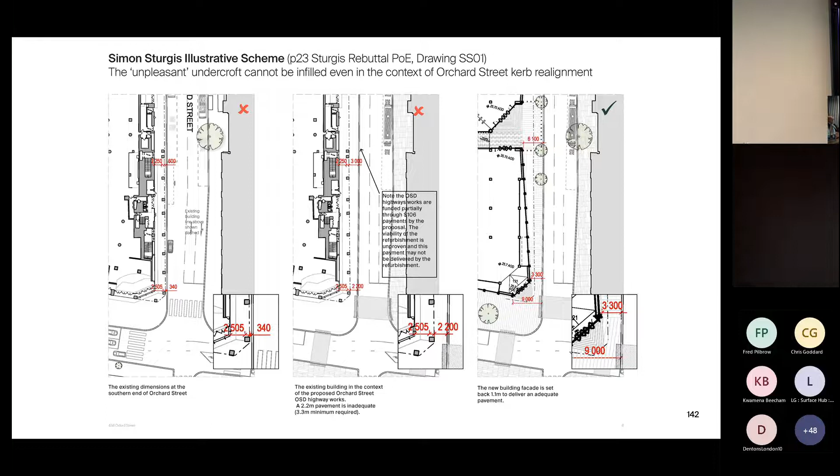Not so. We set that building back by 1.1 meters to give you that right dimension. So you need 3.3. That's a figure we get from TfL's highways design standards. And in the existing building, the pinch point is 2.2. Now, there was a discussion with Alec on our site visit about the relationship to Hesketh House, and Carolina very kindly looked at it for me.

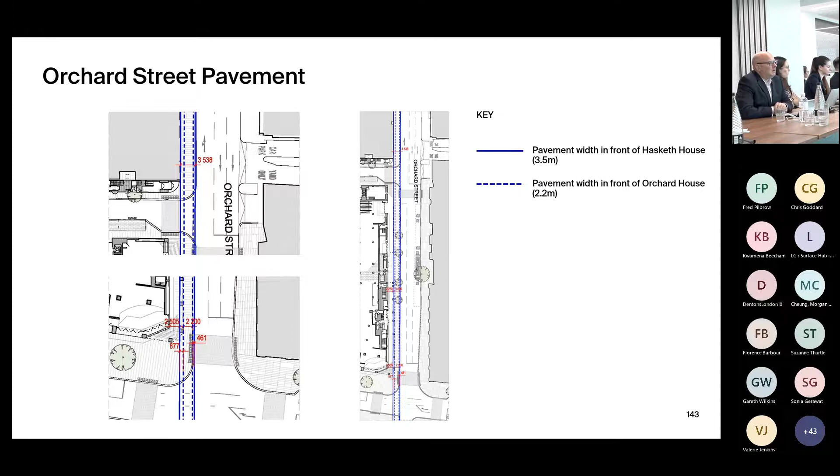So at Hesketh House, the curb line existing is 3.5 meters. But unfortunately, Orchard House pushes east from Hesketh House by 877 millimeters, and the curb line in the new arrangements comes in the other way by 461 millimeters. So I'm afraid with the existing building and the proposed highways works, you end up with a 2.2 meter pavement. It's just not enough.

The conclusion, you have to keep the unpleasant undercroft. So we've got a loading bay, which I think technically doesn't work, and we've got an undercroft, which has to stay, both undesirable. But what about the third element in Simon's sketch, a retail arcade? Now, I'm bound to say that I think it's in the wrong place, and I think the powerful diagram to link St Christopher's Place to Orchard Street in the historic line is to be preferred. But let's say you ran with that.

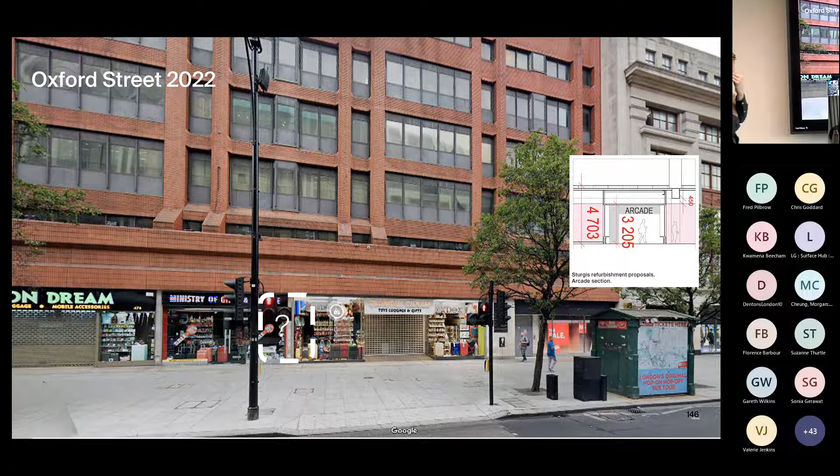Here we have, I go to the next, this is the context. So we're keeping this, that is the arcade. It runs all the way through the depth of Neale House. So unlike our arcade, which is top lit, it's really a tunnel. And the clear height, if you allow 450 for services below the structure, you're looking at a clear height of 3.2 meters. So I think it's a very, very poor quality public space.

We talked about the basement, so I won't repeat it. Essentially, a refurbishment retains the existing basement. What's the consequence for an M&S occupation? Well, they can't do lower ground floor retail, so they're going to be on several levels up the building. This is simply saying if you take their brief, which is 108,000 square feet, they're up into and including level 4 for their storage requirements. And this is just to remind you of the basement as proposed in the new building. None of that could exist in the refurb.

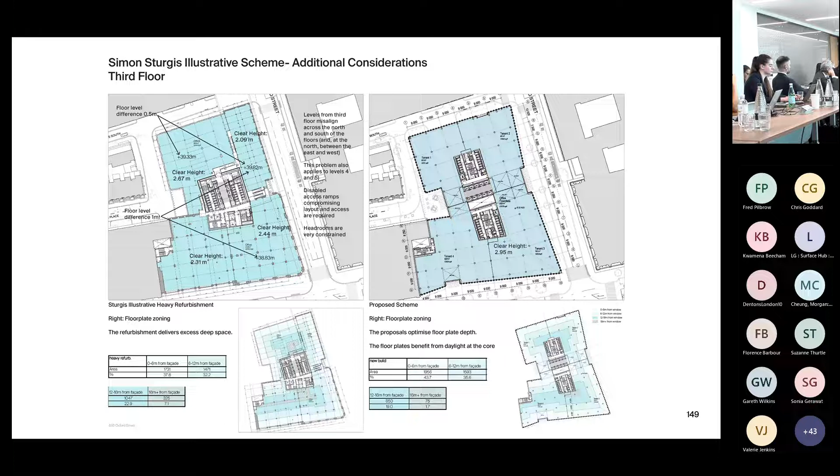And of course, we've left unsolved the really big problems, which are the dense column grids. They're still there. We've left unsolved the problems of misaligned floors at levels 3, 4, and 5. And we've left unsolved the overall development potential of the site. Clear heights would be constrained again. This is taking a conservative assumption that we need 450 below the ceilings to give you 2.44. I agree, by the way, you wouldn't necessarily put a ceiling in, but this piece of servicing will be at that level compared to nearly 3 meters to the underside of servicing in the proposed.

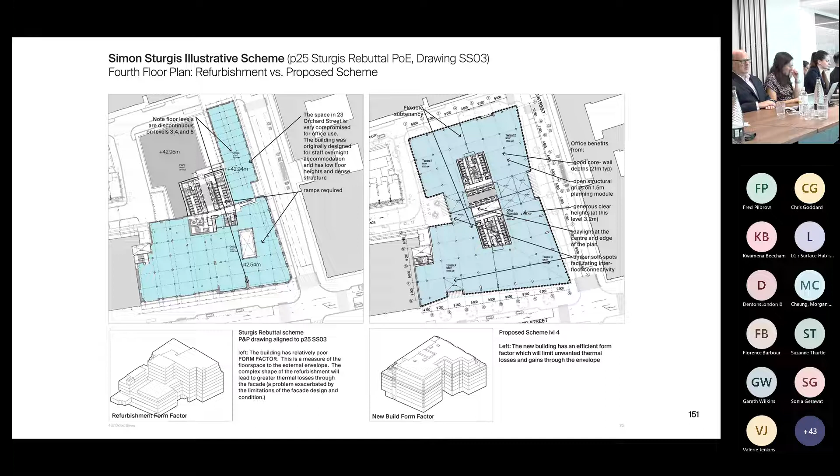And I think there's a wider question, one that Simon will be alive to, which is about the form factor of the building. And what's efficient, if you look at LETI guidance, is you want a really regular, compact form to deliver the most floor space in the most economical, regular envelope. Of course, a building constrained by the existing is a building that has lots and lots of perimeter. That perimeter is leaking heat in the winter and gaining heat in the summer. So it's not good urban design principles to have such an irregular shaped building on the site.

So I guess to summarize, sorry I've gone on so long, the existing building is about 35,000 square meters, the proposed, which I think represents the needs of the site delivered, just shy of 61,000 square meters gross, and an exemplary retail environment, securing M&S in the long term and making its contribution to the future prosperity of Oxford Street. Offices of the highest caliber meeting Westminster's goal for another 67,000 employment spaces within the international centre.

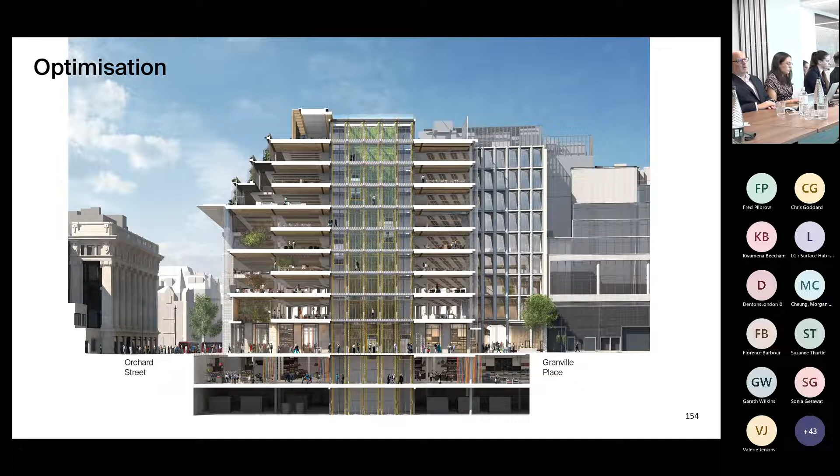The transformation of the quality of the public realm that would be entirely undeliverable in the context of any refurbishment, be it light or comprehensive, an absolute step change in the quality, an enhancement to surrounding conservation areas, including here, the Portman Estate Conservation Area, and the restoration of a decent environment for Hesketh House, and a building that will complement the fantastic architecture of Daniel Burnham's Selfridges department store. I think that should probably have done, and probably overdone. So thank you for your patience.